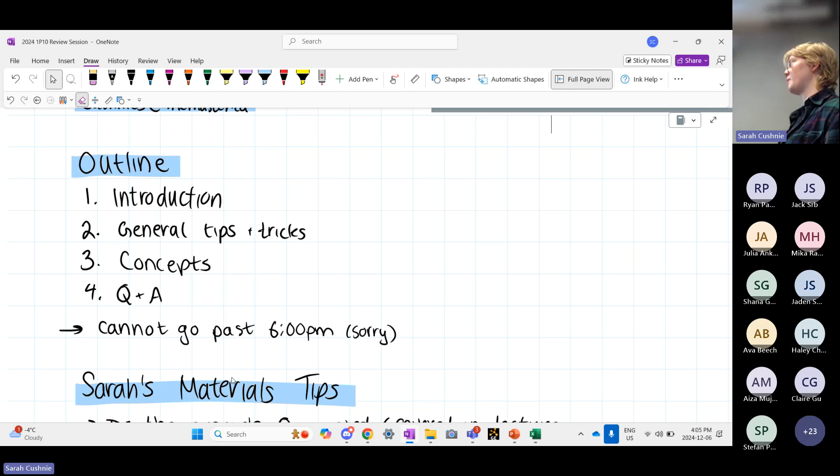So kind of what I'm going to be doing: I just did a bit of an introduction, I'm going to go over a few more things. I'll go over some general tips and tricks for the mid-year exam. Then I'm going to review some core concepts that I think are really important to your overall understanding of materials engineering. And then after that, we can do any sort of Q&A that you may have. But I cannot stay past 6 o'clock. If we do run out of time, then of course my email is always open for questions. I would so much rather answer your materials questions than study for my own exams.

And then my last disclaimers before we get started: I am not a professor, I'm not a TA, I'm not an expert. So I can't guarantee that everything I say will be 100% correct, but I have been in the materials engineering stream for quite some time, so I like to think I have a decent concept of it.

You guys are also covering a lot of different content than what we did in first year. Some of it's the same, some of it's different, so I might not be an expert on some specifics. Some general tips: do the example questions posted and covered in lecture. My midterm for 1P10 and the final exam had some questions exactly the same as those in the lecture slides, even the numbers, which was crazy because ours was open book.

In terms of materials engineering, I really suggest focusing on understanding the concepts, not just memorizing them. There's a lot of content, but if you can relate the concepts together, it'll make it a lot easier. I'm going to try my best to explain how all these different concepts relate to each other.

The exam can feel really long. I remember the 1P10 exam felt particularly long because there were so many different components, but just take a deep breath, I believe in you, you got this. The other two things: watch your units. Make sure you always include units in your answers, and understand unit conversions like newtons over meter squared versus newtons over millimeter squared. That really tripped me up back in first year.

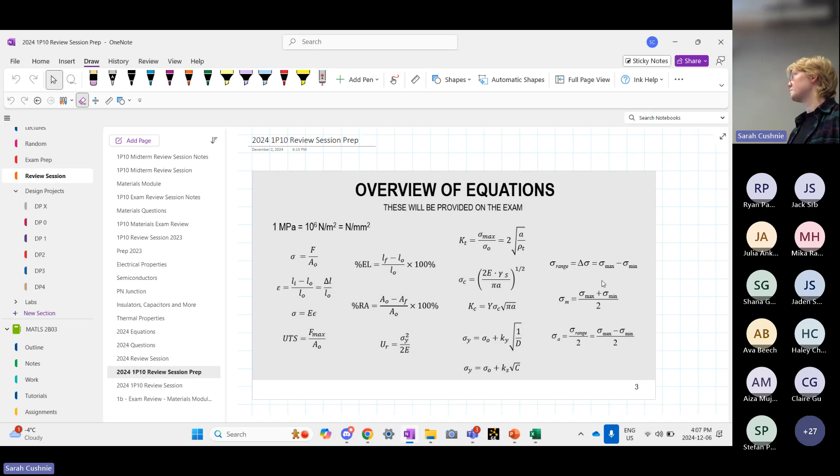Understand your formula sheet. You're given this formula sheet, and it's really important going into the exam that you understand what all these symbols mean and what they're called, so that when you're asked to calculate, for example, the yield stress, you're not looking at your formula sheet wondering what equation to use. Even if you don't know exactly how to solve something, you can quickly narrow down your options just by understanding your formula sheet.

So those are my general tips. Now we're going to get started into our main concepts here.

The big question I want you to continually ask yourself as we review materials engineering is: what makes each material different? What properties are changing? That means, what is happening in the material that changes its properties? How is a metal different from a polymer? What is actually happening there, and how does that affect its behavior?

As we go through this overarching question, we're going to talk about the types of materials. Then we'll get into bonding, stress and strain, fracture mechanisms, and strengthening mechanisms. I know you covered other topics too, but we only have so much time, and I think these are the most overarching concepts in general.

If you have any questions or points, just raise your hand, yell at me, whatever. The first thing we're going to talk about is types of materials. There are three main types of materials.

The first one we're going to talk about is metals. We're all familiar with metals—I want us to try to relate these back to things we know, like cars or the size of whiteboards, things like that. They're all metals. We know that they're hard, we know you can bend them if you try, like bending a spoon. We know that they're ductile, and we know they can conduct heat—for example, if there's a metal pot and you touch it, it's going to be really hot. So those are some of its properties.

We also have polymers, which is just a fancy word for plastics. Again, we can think back to examples of plastics in our lives, and there are so many of them, right?

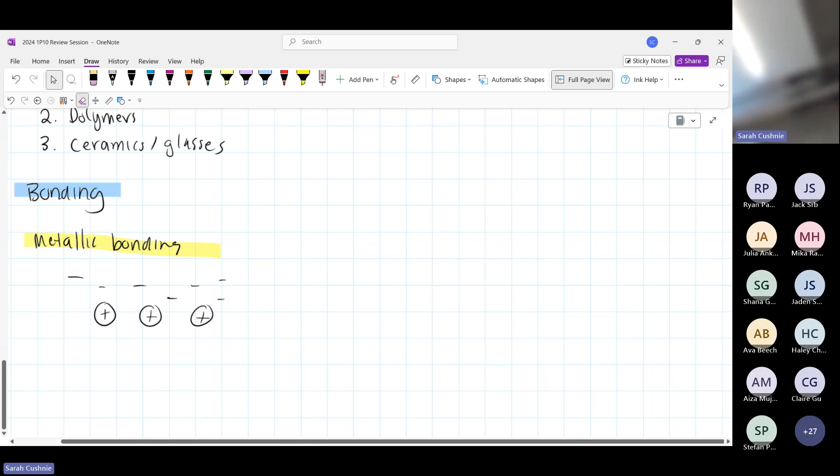The way metallic bonding works is we have all of our protons in our atoms, and their electrons form what's called a sea of electrons. So we have all of these negative charges, but they're not connected to any particular atom. What they're doing is they kind of just float around, and they're attracted in general to the dense proton clump, protons and neutrons, but they're not necessarily bound to any specific one.

Because of this, these electrons are able to move back and forth. They're not bound to any specific proton, which means they're able to move back and forth, and that's what gives it its conductive properties. So it's conductive because of that sea of electrons.

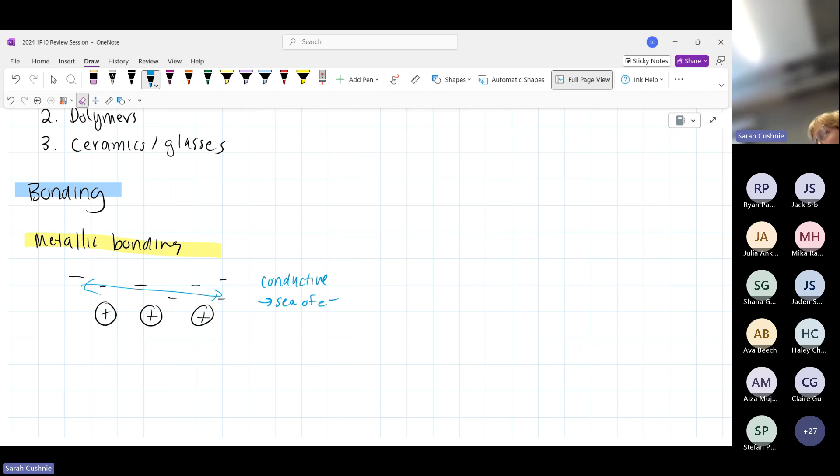Also, because these electrons aren't firmly bound, that means there aren't super strong bonds in between all the materials, which means they're able to be deformed a little bit. We're not creating some sort of lattice where we have very specific bonds. They're kind of floating around, which means we're able to move them back and forth, twist it, turn it, whatever, and that makes it ductile. So we're seeing how we can relate the kind of bonding present to the properties of the metal.

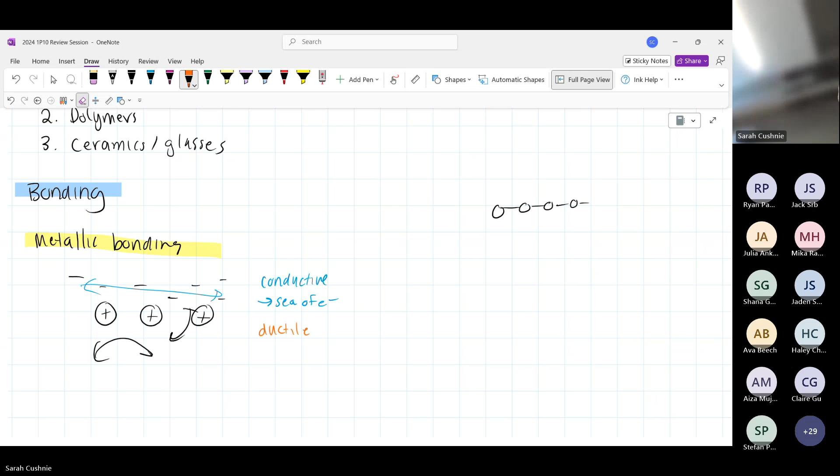The next kind of bonding we can talk about is ionic bonding. No, actually, we're going to do covalent bonding first to match up. So we're going to do covalent bonding. You guys take chemistry second semester now, don't you? Okay, but from high school chemistry, you probably remember covalent bonding. This is sharing electrons. So we have, whatever, two, we're sharing the electrons. This is genuinely a terrible drawing, but we're sharing it on the same valence, whatever it looks like. What this comes down to is sharing electrons.

Now note that this is directional, right? So we're not sharing in a sea of electrons where there's no specific direction the bonding is occurring, but in covalent bonding, we're bonding with an atom next to us. It's very directional.

So because of this, because it is directional, that means it depends on the ions themselves. Depending on how strong these charges are, the strength of the charge will determine a lot of the properties of the bond.

So what this means is we can change the charge in the covalent bonding depending on whatever material we have. By changing that, by changing the number of bonds, all these quick things we can change, we're going to change the strength of the bond dramatically. And if we have a stronger bond, that means it's going to be harder to deform, harder to move, making the material much more hard. But if we have weaker bonds, it's going to be a lot easier to deform, more ductile. This kind of bonding is present in polymers, and this explains why we have such a wide variety of applications and properties in polymers, because you can so quickly change the covalent bonding by changing the ions themselves, by changing the number of bonds present.

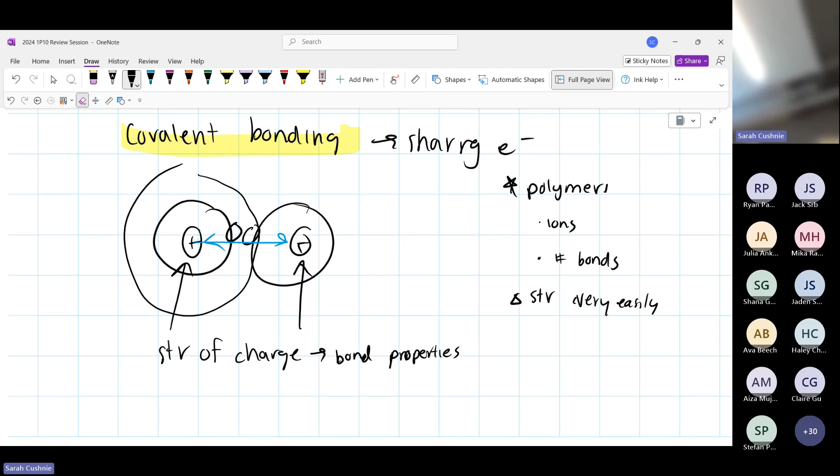By changing the number of bonds present, all of this means we can change the strength a lot, very easily, and change it by a lot. This is typically done by non-metallic elements. Again, you think of polymers, you think of carbon, nitrogen, and things like that.

The last kind of bonding is ionic bonding. These are my favorite because I think they're kind of fun. And ionic bonding, again, we hear of this all the time. It's where you steal an electron.

So we have some sort of positive charge, and then we have some sort of negative charge, and it goes yoink, and it steals the electron. In a very technical term, I think you should write that on the exam. And what this means, because we're stealing an electron, right? Like you give up the valence electron or you take the valence electron, whatever. Because we're stealing this electron, that makes it very, very strong. But once again, this is very directional. So we're stealing it from a very specific atom.

So what we're going to end up with, let's say we have a metallic element, metal, and that's going to steal the electron. Oh no, it's going to give up electrons, give up E. And then we're going to have some sort of non-metallic, and this is going to take E. We're going to have some sort of lattice that ends up being formed, right? Here we have, I'm just going to do it in one direction to be safe. So we have all of these bonds going back and forth where we're stealing it from a very specific atom.

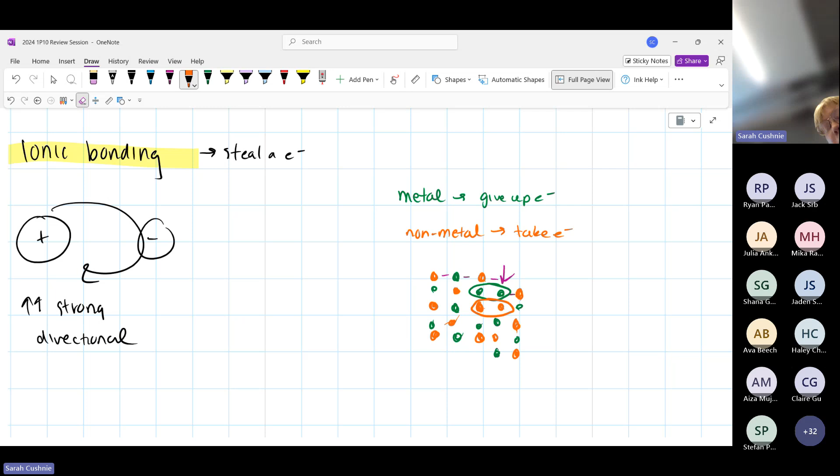But what happens if we were to, for example, apply some force to one of those rows? And now we shift this all down by one. Oh, actually, this is a terrible example. I need to do a proper lattice for this example to make sense. Okay, so now we apply some sort of force, and we end up shifting this down by one spot in the lattice. Now all of a sudden, we have the green next to the green, and we have the orange next to the orange. I realized that these were terrible color choices for anyone who might be colorblind, so hopefully my circles make enough sense.

We have these two lined up to each other. These are like charges, remember? And you have two of the oranges lined up to each other. These are like charges. And if you remember from high school physics or whatever background you may have, like charges repel each other. So as soon as you have a mild amount of deformation and you get those like charges next to each other, they're going to be repelled so hard, and we're going to end up actually breaking this bond. So that's going to separate. So what this means is that ionic bonding is extremely brittle. It cannot withstand very much deformation until it snaps apart.

And this again relates to the material properties. So I'm just going to write here, very brittle. And this is seen in ceramics. And again, when I think of ceramics, I think of a dinner plate, right? As soon as you have any sort of crack that forms, it just snaps apart because you get a tiny amount of deformation. And now you have these like charges lined up against each other, and they don't like that. So they're going to push each other away, and they're going to end up breaking those bonds.

Ceramics. Some other properties that go along with the very strong bonding in ionics is that it has a very high melting temperature. And then these electrons, right, they're stolen. They're not being shared, which means that it's not going to conduct at all. So no conduction. It's kind of fun. Sometimes a prof, I don't know if Dr. Sask ever did this, will bring little bits of magnetic lattices and show you how if you just move it slightly, it'll all blow apart. It's kind of fun to play with.

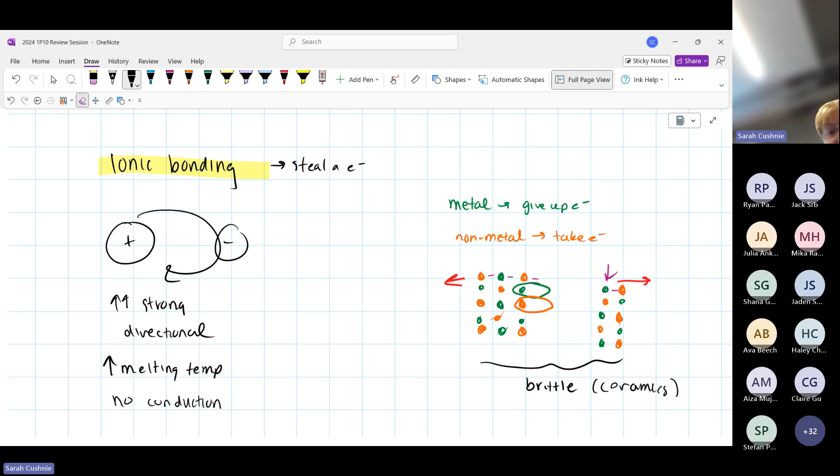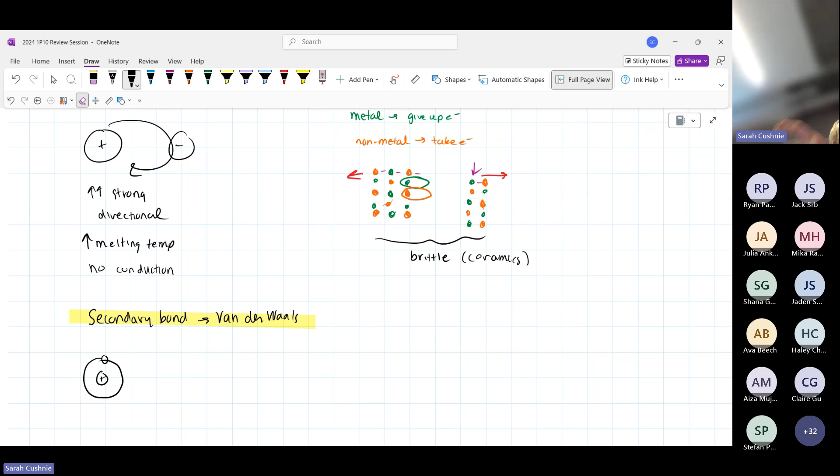Anyways, so those are the three kinds of bondings. There's also the secondary bonding. So last piece of bonding here: secondary bonding, or van der Waals. So essentially, molecules have electrons, right? And we like to think of our electrons as this nice little valence, but in reality, it's a bit of a cloud. They're just kind of existing there in some sort of general area.

And what happens is that for whatever reason, this cloud of electrons is going to orient itself ever so slightly unsymmetrical, and it's going to create a temporary dipole. So now we have this electron that's not fully centered, so we're going to have a bit more of a negative charge on one end where that electron cloud is, and a bit more of a positive charge on the other end.

And now let's say we have that happen to another molecule nearby, right? Again, we have this electron cloud, but all of a sudden we have a positive charge right next to it. The negatives are going to be attracted to that, so it's going to form a secondary dipole in response. And what this does is we're going to get a very, very weak bond between them because we have a bit of a positive charge and a bit of a negative charge, so they're going to attract.

These are really, really weak though, because, in ionic bonding, we have those ions that are present. We have those positive and negative charges that are there. But in terms of van der Waals, these are temporary fluctuating dipoles, which just means that they're there just because the electron cloud shifted a little bit, but it's not going to be there all the time. So that means that it's very weak.

Now, why do we care about this? That is because these bonds are often present again in polymers. So we'll have a polymer chain, and then I'll have another polymer chain, and these are connected by covalent bonds, but between the chains is where we have the van der Waals bonding. And this is why polymers as well can be very weak if we don't have very strong van der Waals forces.

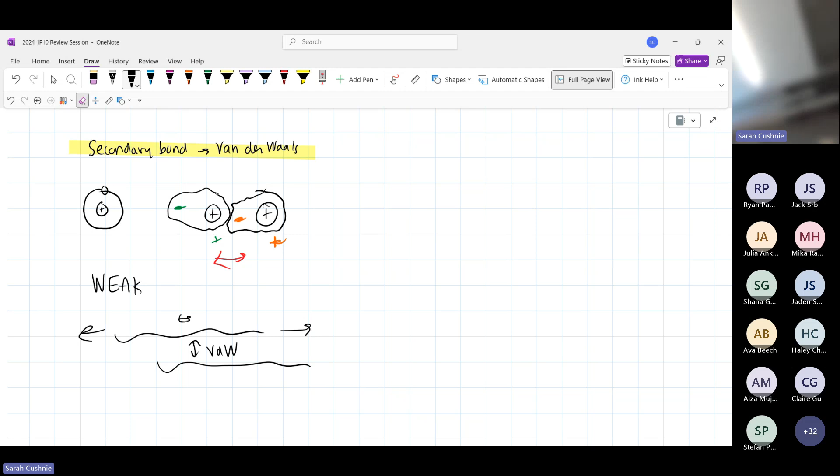Sometimes it's kind of cool. You can get extruded plastic where in one direction you're pulling on the polymer chains like this. So you're pulling on those covalent bonds and it's really, really strong. But then as soon as you pull it in the other direction, all you're doing is separating those chains based on the van der Waals forces and it has no strength at all. And I think it's kind of neat.

But basically all we need to know about this is that it's the electron cloud that's shifting and makes them very, very weak. And that's kind of my quick overview on bonding in molecules. Any questions so far? Beautiful. Go for it.

Yes, of course. That was a really terrible drawing on my part. So I like to think of polymer chains. Polymers are very long molecules. I like to think of them as spaghetti noodles because I'm not a very technical person when I think about studying. So we have this spaghetti noodle, that's a polymer chain, right? And we have another spaghetti noodle, that's a polymer chain next to it. And within the polymer chain, we have covalent bonds that are holding the molecules together, right?

Like the CO, whatever it is, I took Orgo last year, so I actually forget everything about it.

But you end up with these strong chains. If you were to pull on it along the length of the noodle, it's going to have some force resisting you. But between them, we're having those fluctuating dipoles. So they're having those van der Waals forces that are holding them together. This is like if you have two spaghetti noodles and you have a bit of starch that connects them, right? So they're held together a little bit by those van der Waals forces. But it's not nearly as strong as the actual force of the covalent bonds that's holding the thing together.

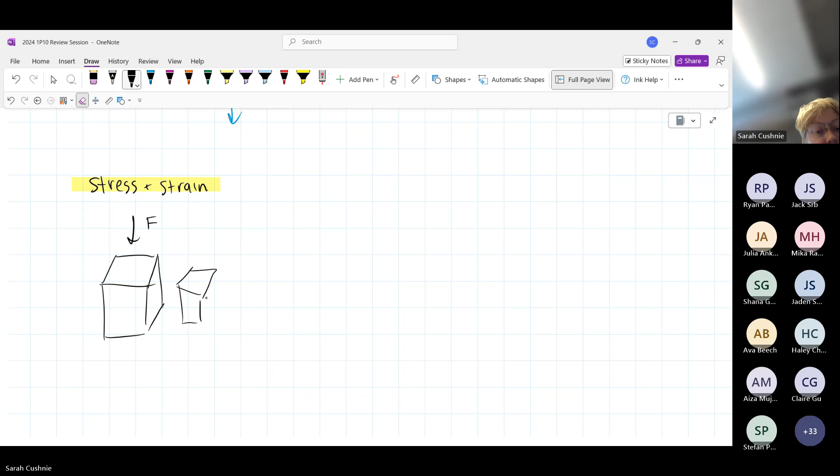And now I apply the exact same force on it. It's going to squish, but not nearly as much. It's just going to squish a little bit. Even if these blocks are made out of the exact same material, it's going to squish less if it's big than if it's small. So if we're trying to describe the behavior of a material, we can't just say, oh, it's squished by this amount, like its displacement was this much, if you want to be a bit more good words than just saying squishing it.

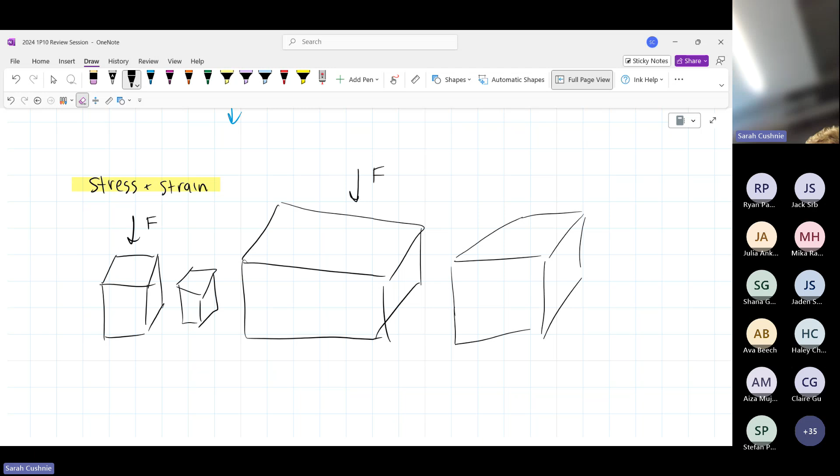But what we do as engineers is we have to find some sort of value to quantify how much it decreased in length by and how much force we were actually applying, to compare these two situations. And that's where stress and strain come into play. So stress is given by sigma, and it's equal to the force over the area. So in this case, if we're applying the same force in both cases, we don't have the same stress because this area here is much smaller than the area on the big block.

So that means that the small block has a higher stress, whereas the bigger block has a much lower stress because it is a much higher area. Note that the area that we take here, when we're talking about normal stress at least, is the area that's perpendicular to the force that's applied. And now we can define strain using epsilon is equal to the change in length over the initial length. So what that is saying is essentially how much did it actually change in length by. So if this is its initial length, L naught, the change in length is however much it was squished by. That's delta L.

So the units for stress, if we were to look into the units here, this is newtons over meters squared, if you were to work in SI units, because newtons for force, meters squared for area, and that would give you a unit of pascals, which is what we typically refer to our stress in terms of. A more common unit for stress, however, would be newtons over millimeters squared, and that gives you megapascals, which is equal to times 10 to the 6 pascals. So it's really, again, just important to know that these conversions exist, so when you're doing your questions, you have the right answer, or the right units.

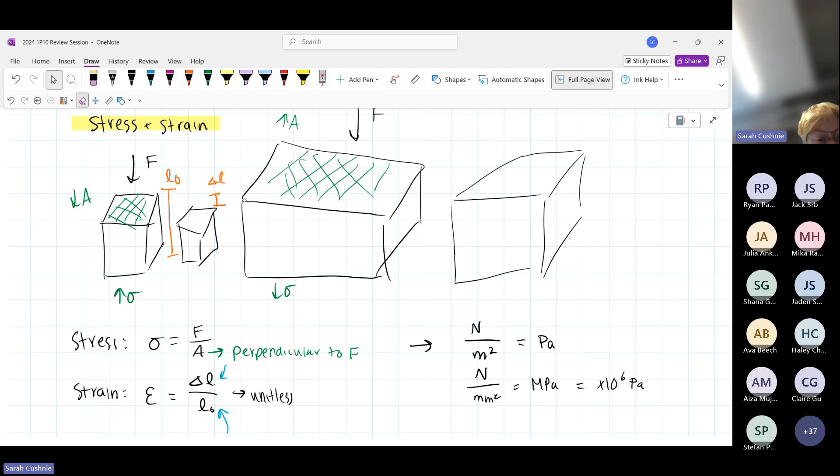So there's a few different things that can happen when we apply this force to a material. So let's say that we have some bonds here. I'm going to make another lattice. Check. So again, I'm going to apply some sort of force, just on the edge, for example. Or we can apply it over the entire area. So I'm applying some force. And what's going to happen when I start to apply this force is the bonds are going to bend a little bit, right? They're going to get squished as I apply.

Actually, for a better example, I'm going to be applying a tensile force. So as we start, the bonds are just going to stretch a little bit, right? You can think of, for example, covalent bonding or ionic bonding. Those electrons that are being stolen or shared are still connected to that initial atom that they were bonded with. They're just a little bit further away, and they're not happy about that. So we're going to start by bonds stretching.

Bonds stretch. And what happens is when these bonds stretch, as soon as you release that force, they return back because they're not happy being stretched, but they're like, whatever, we can go a little bit far away, but we're going to come back to what's normal as soon as we release that force. So they're going to get all stretched out, but as soon as you release the force, it's going back to normal. But if you apply more and more force, these bonds are actually going to break. Bonds break. If you want to be technical, then you can talk about the planes shearing.

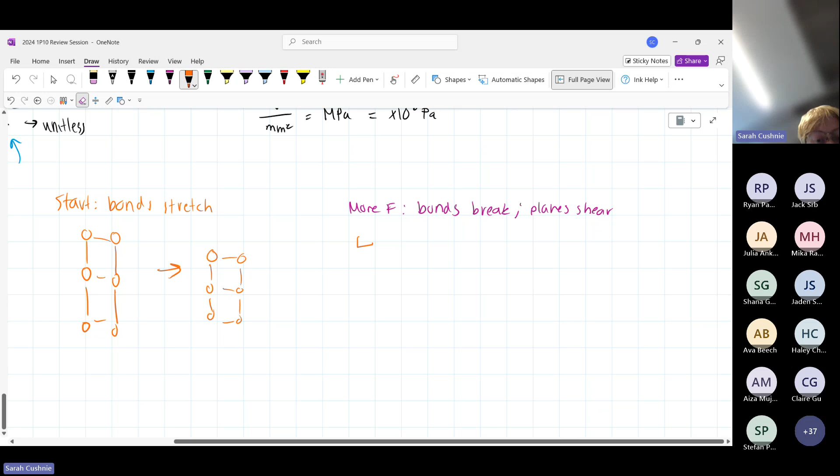That's what you had in your slides, at least. So what's going to happen is... my computer's really old, so the middle of the touchscreen doesn't work properly. Every now and again I go to write in it and it just glitches out, so bear with me.

So we have our lattice. I'll draw a proper hexagonal lattice. Now we're stretching it. If you think about this, we have planes running along it, which are just directions where the bonds are closest to each other, where the atoms are closest.

But eventually we pull on it so far that it's going to shift, and we end up having something like this, where we've broken a bunch of these bonds. Those bonds are now broken, and the atoms themselves have moved from where they were before. If you were to release it, those bonds aren't going to go back—they no longer have that stretch pulling them back to their initial position. They're stuck there in that broken state. So this is irreversible.

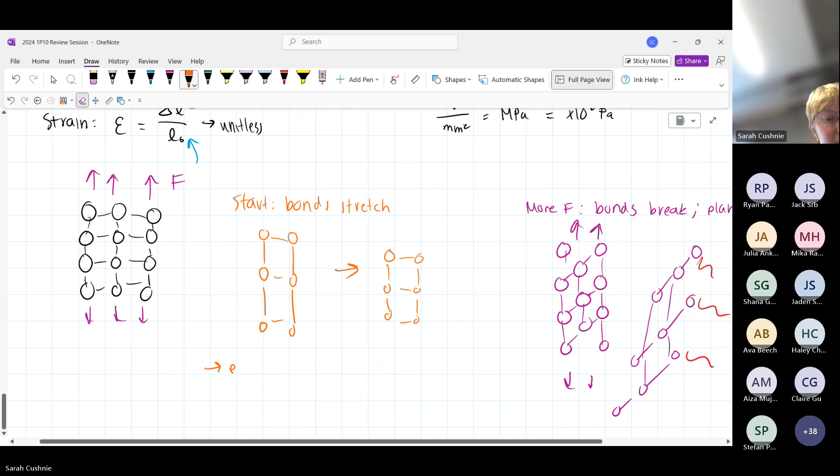That face. Now we have words for what these are called. When we're just stretching it and returning it, we call this elastic deformation—like an elastic spring, if you have F and X, it goes up and down along that path, back and forth, nice and happy. But as soon as we have some sort of breakage going on, some irreversible deformation, that's called plastic deformation.

And it all has to do with the bonding that's going on. So here's a question—I don't know if you're going to enjoy this class participation or not, you can just stare at me blankly if you want. But what do you think would happen if we had plastic deformation in a ceramic material? A ceramic material, remember, has those ionic bonds.

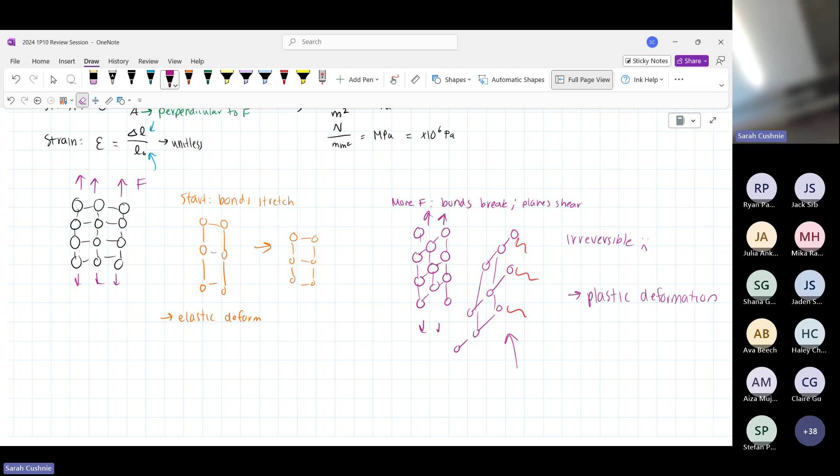Exactly. So we can see that as soon as you try to add any sort of plastic deformation to an ionic material, it's going to snap, because remember we have those alternating charges, and as soon as we have that shear, they're going to be next to charges they normally repel, and it'll break. So this is a hint that ceramics don't have any plastic deformation.

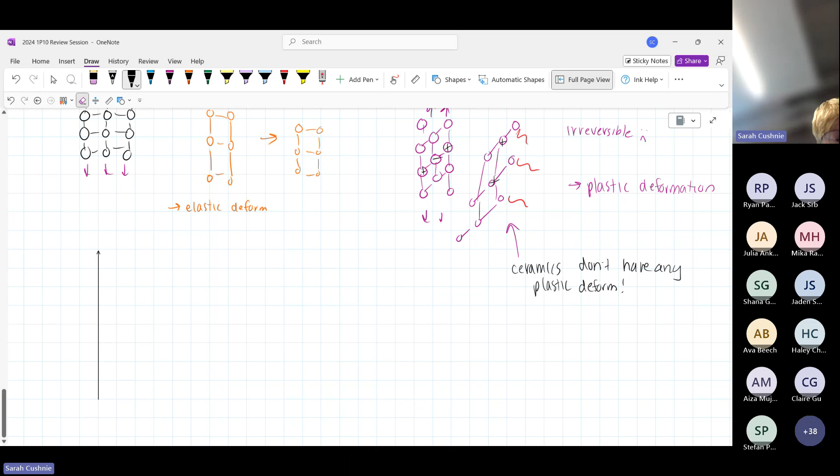So we can start to represent this and draw out these different kinds of deformation and stress and strain on our stress and strain curves. These are like the cornerstone to materials engineering—not really, but they're very important.

We have stress on the y-axis and strain on the x-axis, and this really threw me off when I was first learning it, because I thought, aren't we applying a force? Isn't that the independent variable? Shouldn't the independent variable be on the x-axis? But in reality, when you're doing these tests, you're controlling the rate of deformation, then registering how much force you need to apply to get that deformation.

We're going to start with elastic deformation, relating back to the concept of springs from Physics 1D03—if you have F and X, you get a straight line with a slope of K. So we end up with a linear trend as you stretch it out, having some resistance as those bonds want to pull you back in. They don't like being stretched; they want to return to their optimal bond length. But if you let go, you return exactly where you were before—you can stretch it out, let go, and return to the exact same spot.

So this is our elastic region. Similar to the spring constant for a Hookean spring, we can quantify this slope. The slope is equal to the change in y over the change in x, which in this case is equal to stress over strain. We call this slope Young's modulus, or the elastic modulus.

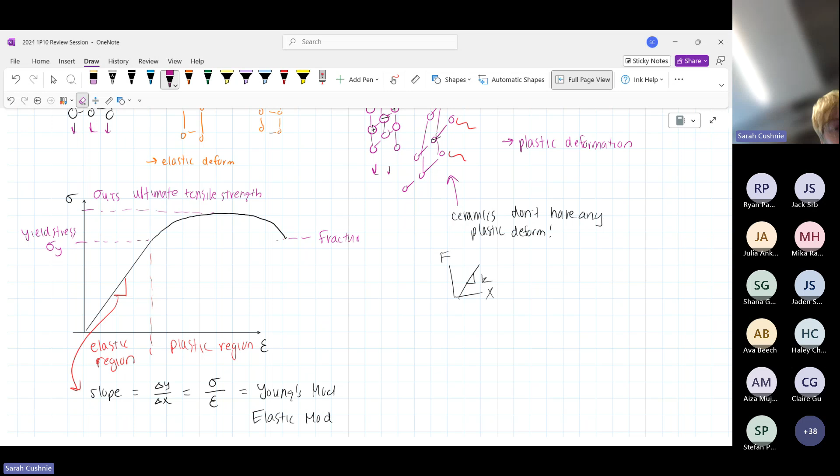That's because anytime we do this test, you're doing tensile testing, so that's the ultimate strength, the ultimate force you get when doing that tensile test. And then here at the end, that's the fracture strength, because that's where it fractures.

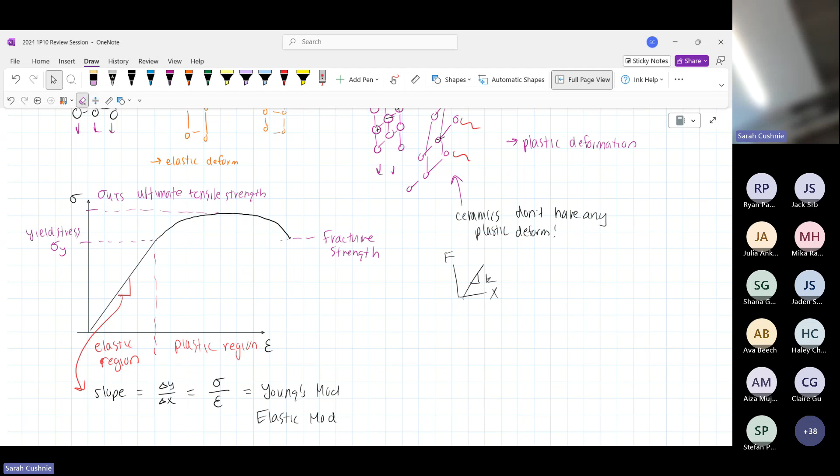It should be noted, this is a bit more extra than what you'll need to know, but I think it's fun. As you're undergoing this process, pulling a material apart, you start with something like this, and it's going to get thinner and thinner as it gets longer and longer. You could think of pulling silly putty or something, it gets thinner as you pull it.

Technically, as you continue to break it, the area decreases. So if you're applying the same force with a smaller area, the stress would actually continue to increase. However, that's a lot of effort, so as engineers, this is technically the engineering stress and strain we're going over, where we only calculate based off the initial area. If you were to calculate the true stress or strain, based on how the area changes over time, it would actually keep going upwards and look something like this. I did one lab on it in second year and thought that was pretty cool, but you never talk about it again because it's a pain to calculate. That's your fun fact of the day.

Some other things to know about this graph: the area underneath. We can think of this as area equals x times y, which equals strain times stress. In terms of units, that's unitless times Newton over meter squared. And Newton over meter squared, if you do the full unit derivation, is also equal to the work being done. So the area under the graph is called the resilience, or maybe it's called the toughness.

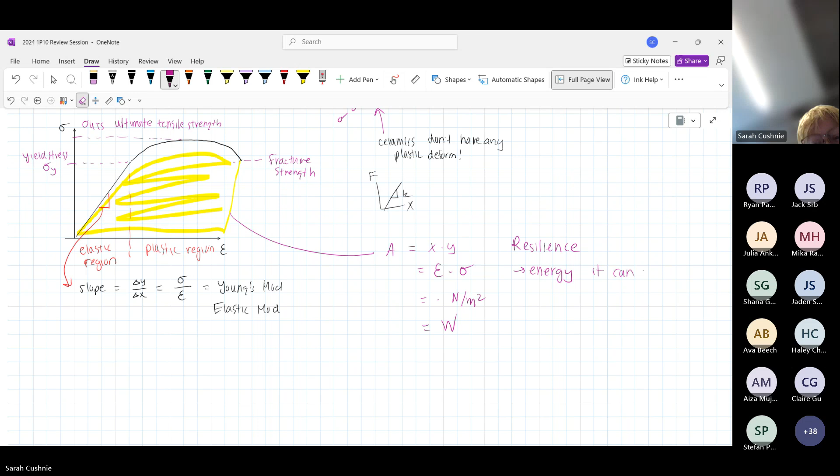If you think of two materials, material 1 and material 2, that have the exact same failure stress, the exact same yield stress, exact same elastic modulus, whatever, but one has a bigger area under the curve, it can absorb more energy. There are a lot of good applications for things that can absorb a lot of energy. For example, with bones, we want bones that can absorb a lot of energy before they fracture. We talk about energy absorption as, for example, when you undergo osteoporosis.

I have my biomechanics midterm next week, which is what's on my mind. We talk about properties like this as they relate to the human body and applications like that.

So we talked a little bit previously about, oh, OneNote, don't glance at me. Every now and again OneNote decides that I'm actually touching my screen somewhere that I'm not, and then I'm unable to scroll, and it bothers me so much. Is it going to work? We're just going to restart OneNote real quick. Ignore me.

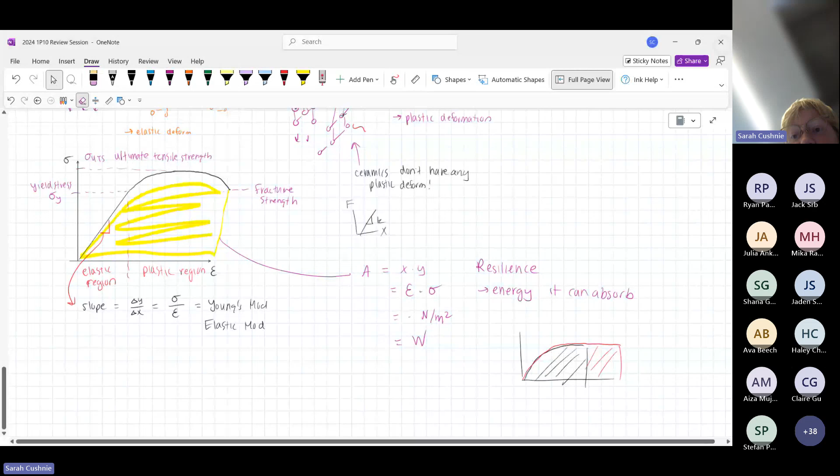So now let's start talking about the stress and strain curves for different materials. I'm going to draw three here: stress, strain, stress, strain, and then stress, strain.

We already talked about ceramics having basically no plastic region whatsoever. That's because they have ionic bonding, so as soon as you start to deform them, those similarly charged ions repel each other and it snaps. So it's basically a straight line, with a very high Young's modulus and a very high ultimate tensile strength, equal to the yield strength since there's no plastic deformation. But it has very low strain, very low elongation.

The next we're going to talk about is metals. Metals have strong bonding, metallic bonding. We still have those positively charged ions being bonded, with electrons floating around creating those strong bonds, but it's not quite as strong as ionic bonds.

So metals have a decently high yield strength, but then they enter a plastic region. Because we have that sea of electrons, there's no specific directional bonding, so it can move around and adapt to changes, making it very ductile. That gives us the typical stress strain curve, with our yield strength and ultimate tensile strength. I like to think of metals as a nice happy medium between ceramics and polymers.

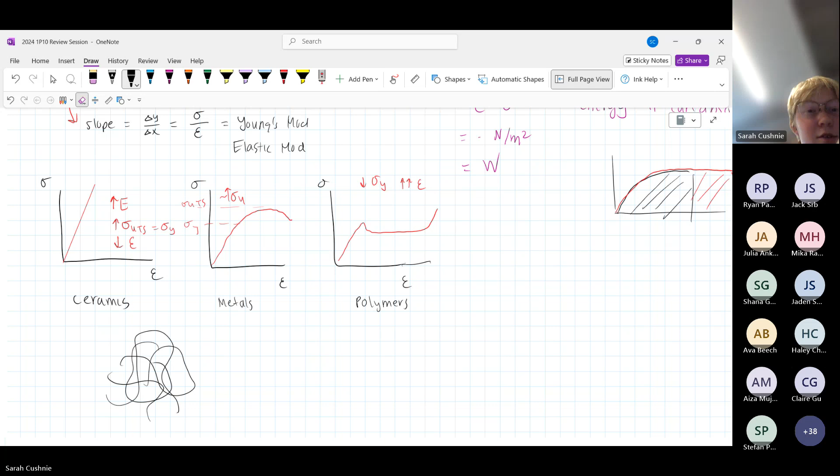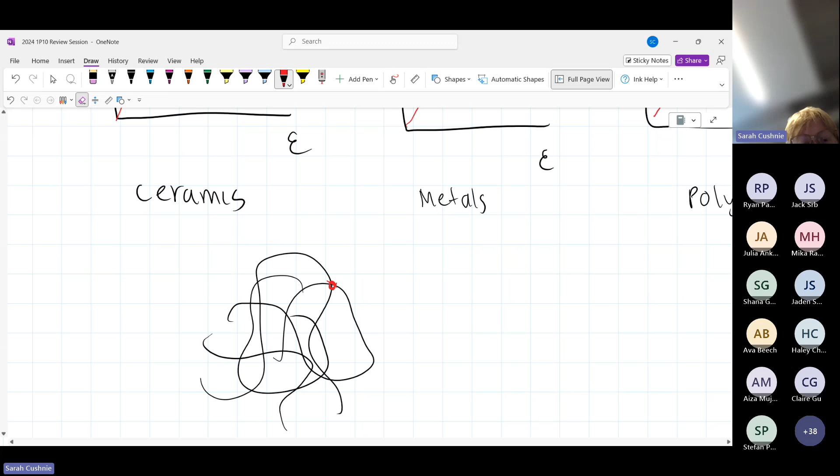Let's say we have a pot of spaghetti noodles, and all of these noodles are different polymers. In between all the areas where the polymers cross over each other, we have bonds, and at each crossing point we could think of that as starch on the spaghetti noodles holding them together. So we have van der Waals forces happening every time we cross over.

When we start to pull them apart, at the start when we're applying force and deformation, we need to break all these van der Waals forces, and that takes a decent amount of work. That gives us the elastic region—as you pull more, you need more force to break these apart. But then suddenly we've broken those bonds, and now we just have long spaghetti noodles without really any strong bonds between them. So what we have to do now is basically like taking the two ends of the spaghetti and pulling those apart.

And all it is, is just untangling them. It's like if you had the cord of my phone because it's charging, right? I've untangled it, now I'm just pulling it apart. It doesn't take any force at all to pull it further. It's the exact same amount of force to pull it apart here as it is here.

For folks who are online, I'm so sorry you couldn't see that. But it's really just untangling it, which is why this doesn't take very much force. So this is low force and no change in stress either, and that's why we get this little horizontal region there, because we're just pulling them apart.

That's all we're doing. But then eventually our polymer chains are basically lined up. We've untangled them enough that they're just lined up. And now what we have to do is pull these apart, and that takes a lot of force because now we're pulling on those covalent bonds. Now we're trying to get those covalent bonds apart, and those are strong. That's why we get the final increase in stress, because it takes a lot more force to pull those apart than it was to break those initial van der Waals forces.

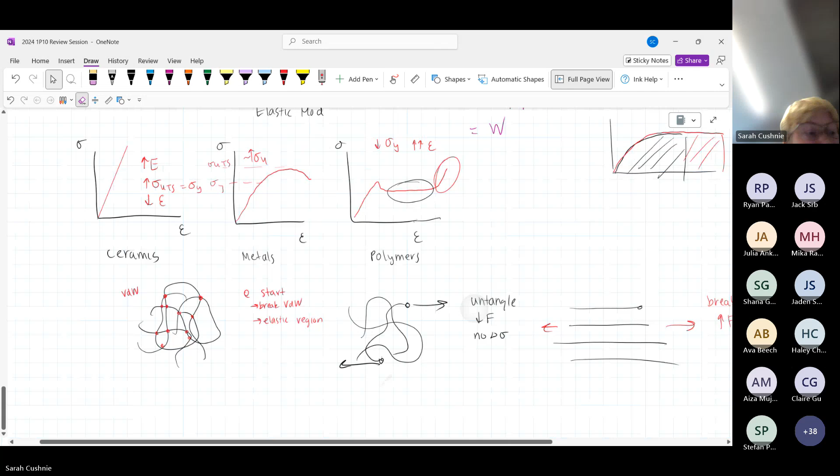So those are the main concepts that I wanted to cover with stress and strain. Are there any questions? Go for it.

Necking, yes. Yeah, it wasn't one of the main concepts, so I didn't put it into what I was going to talk about, but 100% we can talk about it.

So this kind of goes back to when I was talking about true stress and strain versus not true stress and strain. Let me just get the actual slide up so I don't totally goof it. Where would it be? No one knows. Oh, I found it. Okay.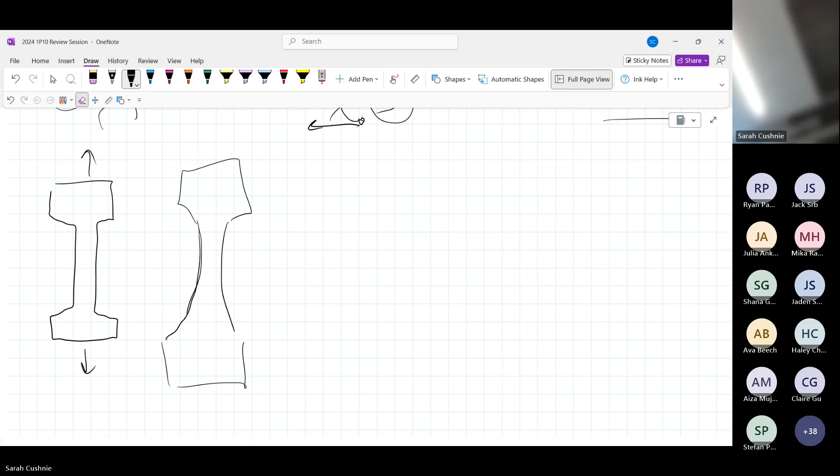So this is going to happen with any sort of thing where you're applying that tensile load: we're starting to get thinner and thinner in the middle. And as we do this, if we were taking into account the area that's being applied, right? We talk about stress being equal to force over area. So as we're doing necking, the area is decreasing.

So if we were to account for this, for the same stress, then we would actually have a higher force. So as we're applying this higher force in real life, it should look something like this. We should have that graph continue to go up.

But what happens is we're not actually accounting for that. We're talking about the initial cross-sectional area. So what's happening is we're applying the same force as before, but now we have a much smaller area. That's going to make the material feel it so much more, because it's feeling so much more stress than what we were applying at the beginning for the same force. So it's going to feel a very, very high stress in those thinner areas.

Because it has the same force but smaller area, it's going to feel a higher stress. That's where it's going to break, in that necking area, because it feels higher stress. So as you continue to pull it apart, at that one section where it starts to undergo this necking process, it's going to quickly become the cause of fracture because it gets thinner and thinner and feels more and more force. Eventually it's going to snap there. Does that make sense?

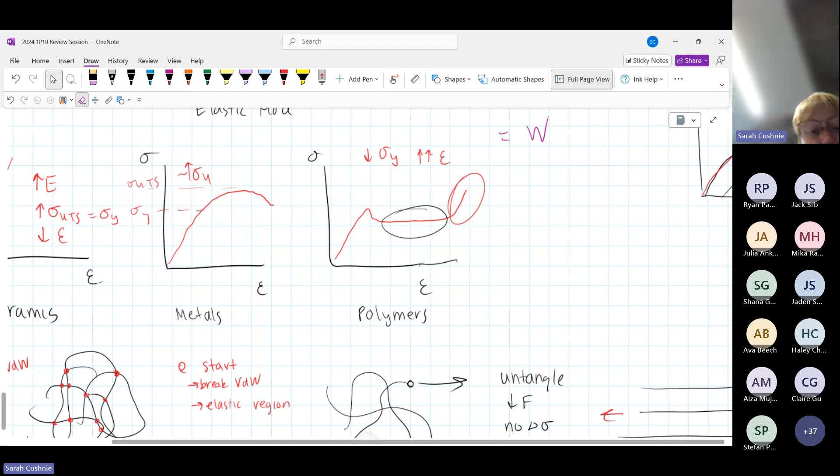Why does that peak go down? Excellent question. The reason it goes down is that at the start, when we're pulling, we need to break those van der Waals forces, which takes a lot of stress and force. But once they're all broken, we can decrease the force needed to pull them apart, because after that we're just untangling them, stretching out the polymers from their crumpled up state without breaking any more van der Waals forces. So it needs less force, less stress, compared to breaking those bonds. Does that make sense? Beautiful.

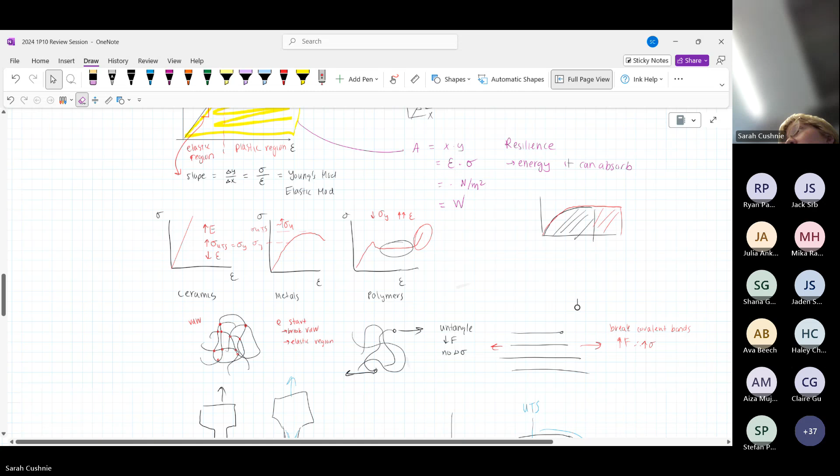Let's talk about fractures. A quick definition: you can talk about failure and you can talk about fracture. Fracture is when it snaps, when it breaks. Failure just means it no longer does its initial function, which can include fracture, but for example, let's say I have this pen. It's actually starting to fracture, it has a bit of a crack. But if the tip got super blunt from writing too hard and wasn't working properly, that could be considered a failure of the material from wear and tear, but it hasn't necessarily fractured. It's important to understand that failure isn't necessarily a fracture. So when we're talking about fracture, we're talking about things breaking, falling apart, and there are two different ways this can happen.

The first is a ductile fracture. A ductile fracture is kind of what it sounds like, it's ductile. What happens here is that the material undergoes some sort of deformation, some sort of bending, before it snaps.

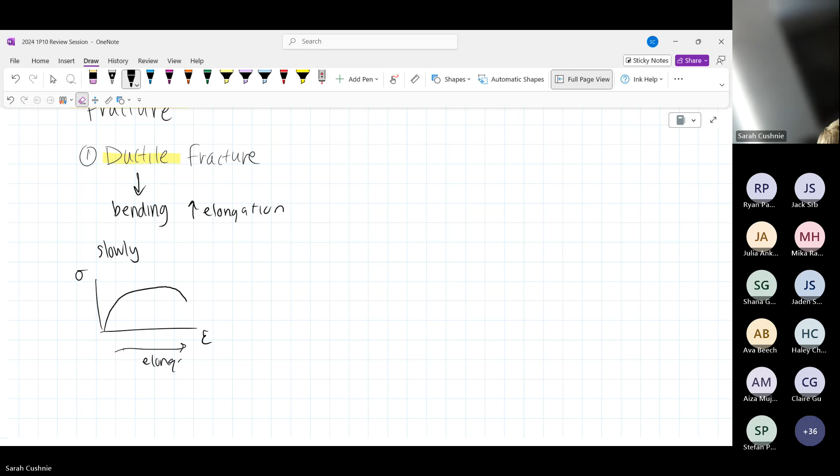So some things about this, because you have bending, then you have some warning signs ahead of time, right? So it happens a bit more slowly because we see this happening. So bending, so we have large elongation. Because it happens slowly, we have large elongation. If we were to think of this in terms of a stress strain graph, we're going to have something like this. Because we have this large elongation, remember, if we talk about the area under the graph, that gives us our energy absorption or our resilience. So in these ductile fractures, we have high energy absorption. So that is one example.

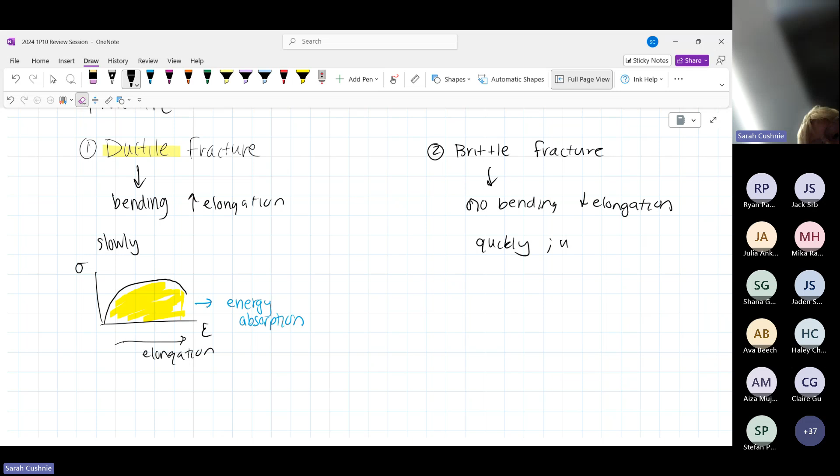The other kind of fracture is a brittle fracture, basically the exact opposite. So what happens in this is that we don't have any bending. No bending. So we have very low elongation. And what that means is that it happens very quickly. And it's very unstable. Once it starts to happen, you really can't stop it. So if we were to think of a stress strain graph, it would look something like this, where you get very, very low energy absorption. And it just snaps. You have very little deformation. You just apply so much force that it snaps.

So if we were to think of this in terms of biomedical application, again, I'm taking biomechanics right now. So if we're talking about bone fractures, right? If you were to be in a car crash and your bone just snaps in two, that would be some sort of brittle fracture. We don't have any warning, it just happens. But for example, if you were to have a stress fracture where you apply the stress continually over time and over time, that would be a bit more of a ductile fracture.

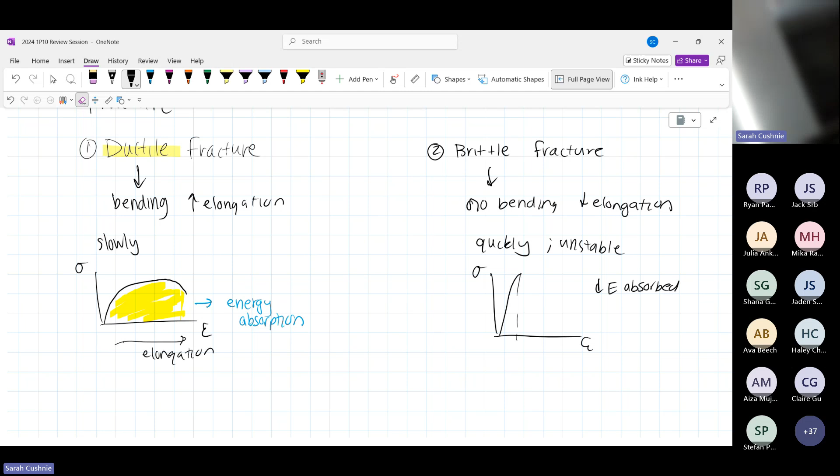So these can both happen in a large variety of materials. Brittle fractures are very common in materials that have stress strain curves that look like that. So for example, in ceramics, the example that we have in your slide is like a hip implant material because those can be made out of ceramics, right? Whereas a ductile fracture can be more common in things like metals, polymers, because they have a lot more of that potential for elongation.

And a good way that we quantify this, there's some snacks at the back if you want any.

So a good way that we can kind of quantify this, or we can start to do calculations on this, is this concept called stress concentration. If you're trying to remember this on the exam, just think that you're really stressed about concentrating enough to remember it. And what this is: let's say that we have some sort of small crack that forms in a material. And this can just happen, inherently we're going to have some areas that have slightly stronger bonds than others. So if we're applying the same force, we're just going to get some bonds that break a little bit first, right? Natural inhomogeneities in the material. So I like to think of it as we get this small crack in the material. So like this is the material, and that's a bit of a crack.

And let's think about the force that's being applied. If we're pulling this under tensile stress, we're pulling it up this way. So you can think about the stress concentration lines, if you will, is that we're pulling all along this line. We're pulling from the top, we're pulling from the bottom, right? And you can continue this line all the way through.

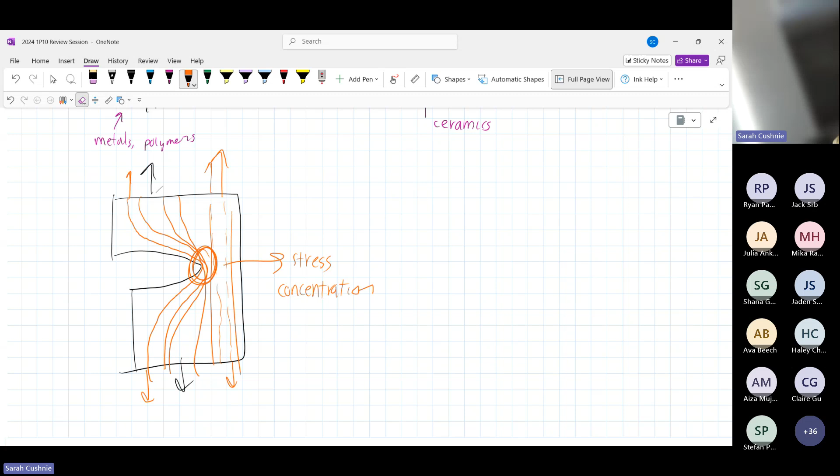A way we quantify this is using the stress concentration factor, KT. And this is equal to essentially the ratio of stress felt at that tip divided by the stress felt literally everywhere else. So this here would be sigma naught, and the stress in there is sigma max. You don't ever get values for that, though. We don't really have a way to calculate that stress, that sigma max at the tip. So we actually are going to calculate this through 2 root a over rho t.

Now I hate this equation because the variables make no sense. But what this means is the variables that we use here, a represents the length of the crack. But note that this is the length of a half crack, actually. So let's say we have a crack in a foam material that looks like this. The length of the crack that we measure is actually just one side of the crack. So this would be a, but the total length is 2a.

So if you're given, for example, an internal crack with a length of 2 millimeters, the a value would actually be 1 millimeter, because a only relates to one side of the crack, because we're only dealing with the stress concentration at one of these tips of the crack. And then this rho t is rho density. Psych, this rho t is the crack tip radius.

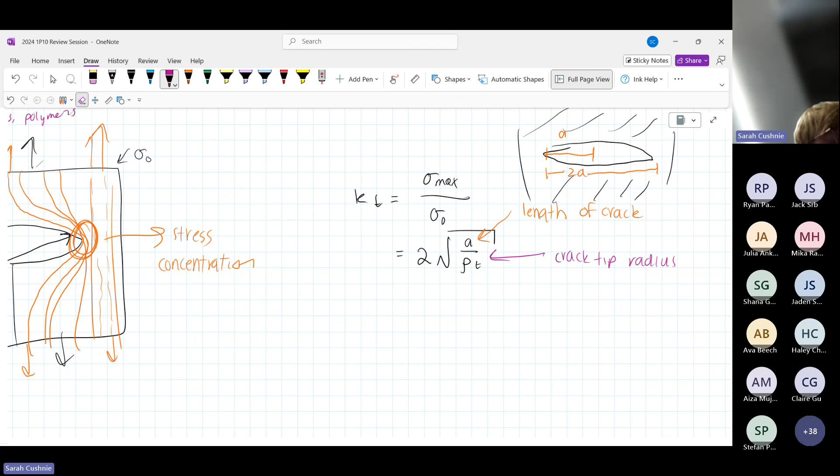And it's for reasons like this that I think it's really important to get comfortable using your formula sheet, because high key, if I looked at this equation, kt is equal to 2 root a over rho t, I would have no idea what any of those variables mean. But this is the crack tip radius. So basically at this tip here, if we were to blow it up, we have some sort of radius, and maybe it's like, I don't know, 2 microns. I actually don't know what values those would be. But if you're trying to calculate kt, you plug it into this equation.

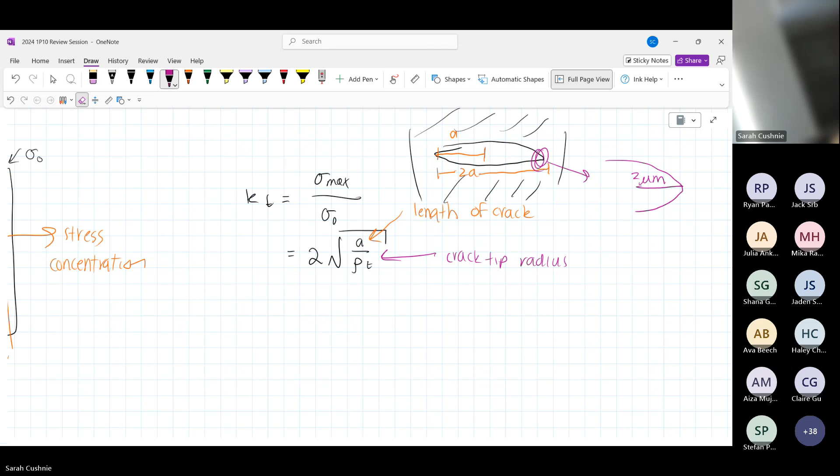So the next thing that we can talk about is how much I hate OneNote, and it's not gonna be happy with me right now.

Okay. Sorry, is the 2 root a over, is that just the max stress or is that the whole? That is for kt. Sorry, I did not specify that. I'll add kt there. What are the units for the length of a crack? Anything relating to meter. What about for a crack tip radius? Yeah, so you just want to make sure that these have the same units, because then they'll cancel out. For example, you might be given the length of a crack in millimeters, but the crack tip radius in micrometers. You just need to make sure you convert them so that they're the same. I don't know if Dr. Sass would give you 2 different units. Yes.

So now we're going to talk about the actual crack propagation. So let's say we have this crack in a material. How do we know if it's going to move through the material, if it's going to get bigger? So for brittle materials, remember, these are ones that have very quick propagation, we're given the formula sigma c is equal to (2 E gamma s over pi a) all to the 1/2.

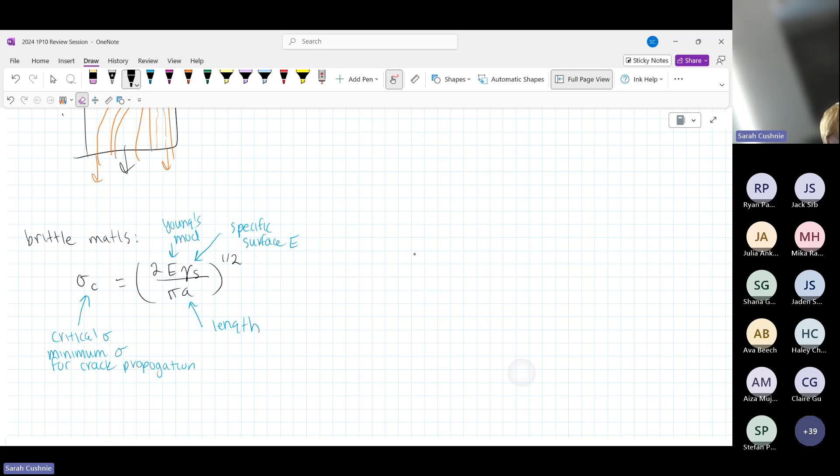And then A, again, is the length. So if we think about units here, the minimum stress, that would be in units of megapascals, for example, is equal to the square root of megapascals over meter, and then surface energy would be like joules. High key for this: if I was trying to do units for this, I would convert it all to SI units. So I would convert it into pascals, and then I would have pascals, joules, and meter.

I think it'd be joules per meter squared. I actually don't know, but if you put it into SI units, the units will work out. So I actually don't know the units for specific surface energy. I have to imagine it's joules per meter squared, but don't quote me on that. So that would be my tip: remember a pascal or megapascal is newtons per millimeter squared, and a joule is like a newton meter, right? Force times distance. So those might not cancel out if you keep it in terms of megapascals.

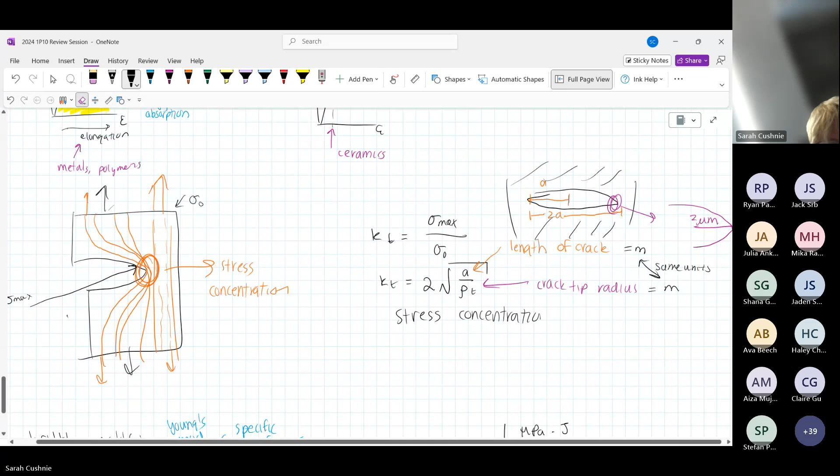So this is for a brittle material. And we can kind of quantify this. So remember, KT up here was our stress concentration factor. And now we have our critical stress. And now we have a very similar variable name to stress concentration factor. We can now call it the stress intensity factor. And this is just regular K, not KT. And K is equal to Y times sigma times root pi A. And we typically assume that Y is equal to 1.

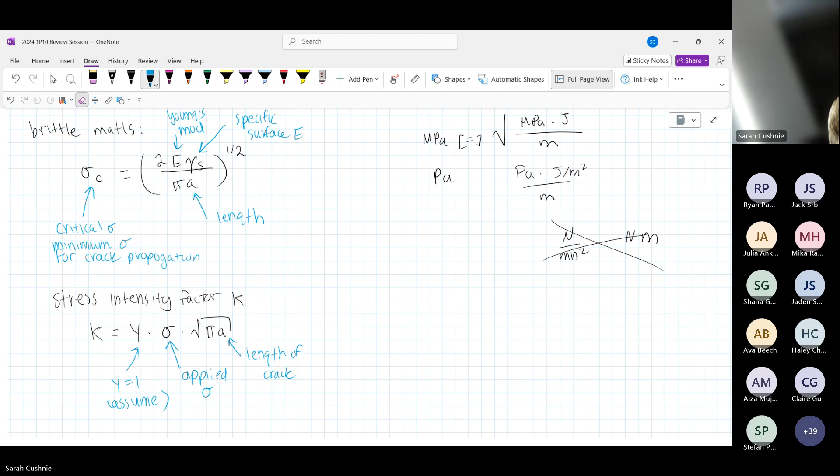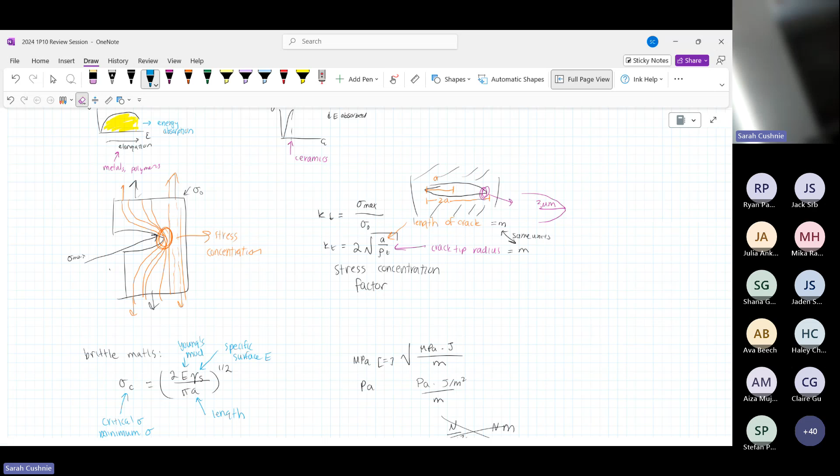And then this sigma is the applied stress. And then again, we have A, which is the length of the crack. And essentially, previously we talked about the stress concentration factor, and this describes how the stress will concentrate at the tip. The stress intensity factor talks more about, based on that concentration, what's the likelihood that it's going to propagate. So they're very, very similar values, but they have slightly different names.

And we can also talk now about another K value, because we love our Ks, which is the fracture toughness, Kc. So we have the stress concentration factor: how concentrated is that stress when we have some sort of crack? We have the stress intensity factor: what's the tendency for it to propagate? And now we have fracture toughness: how much can it resist that propagation?

And I'll be so real with you, fracture toughness is really the only one that I use in any of my courses these days. But they like to give you all the other ones so that you can mess up all your Ks on the exam. There are uses for them, but fracture toughness is by far, in my opinion, the most important. And this is given by Kc is equal to Y sigma C root pi A. So this is the exact same equation as before, but now instead of the applied stress, this is the critical stress.

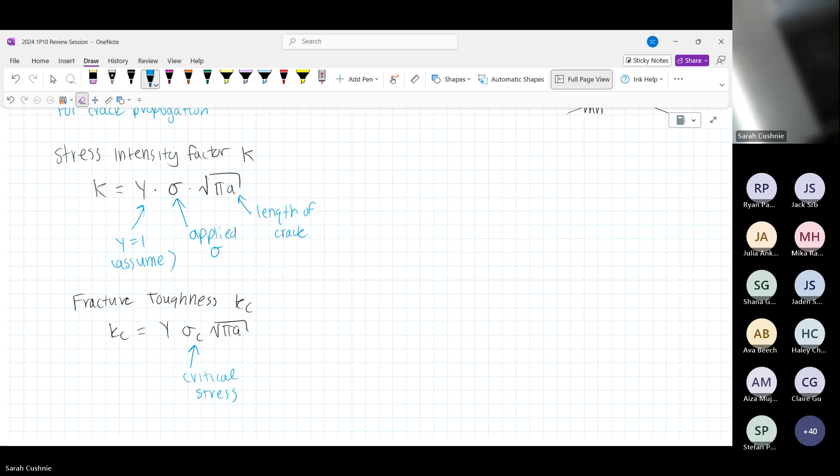So essentially the stress intensity factor is how are we going to respond to this increase in concentration of stress? And the fracture toughness is, what's that maximum stress that we can withstand? So if you were asked to solve for the critical stress, we have this equation up here for the critical stress, but we can also rearrange this equation down here. These are two different ways that they could ask you to solve for critical stress.

And the reason we care about critical stress is because we want to know how much force we can apply to a material before any crack could propagate. Let's say we have a material with cracks of up to 1 millimeter, like concrete, because concrete is full of cracks. We want to ask how much stress we can apply before those cracks propagate and the whole thing falls apart. That's why we care about these values.

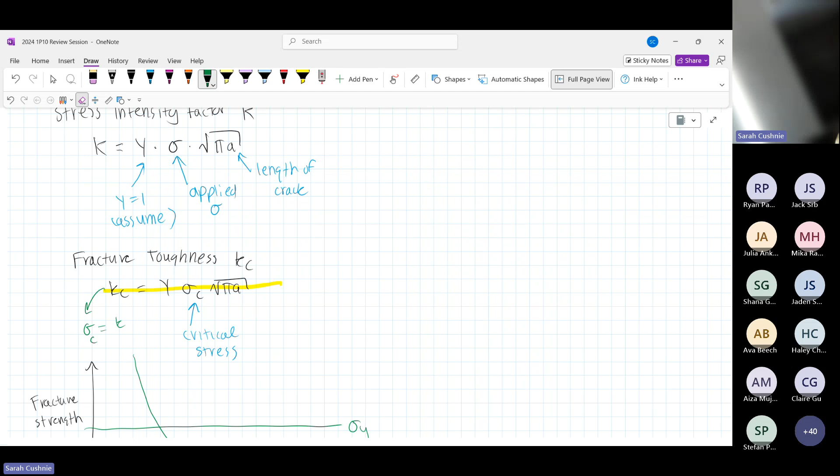But we also have, if we were to rearrange the stress concentration or the stress intensity factor, we can solve for the critical stress, sigma C, which is equal to Kc over root pi A.

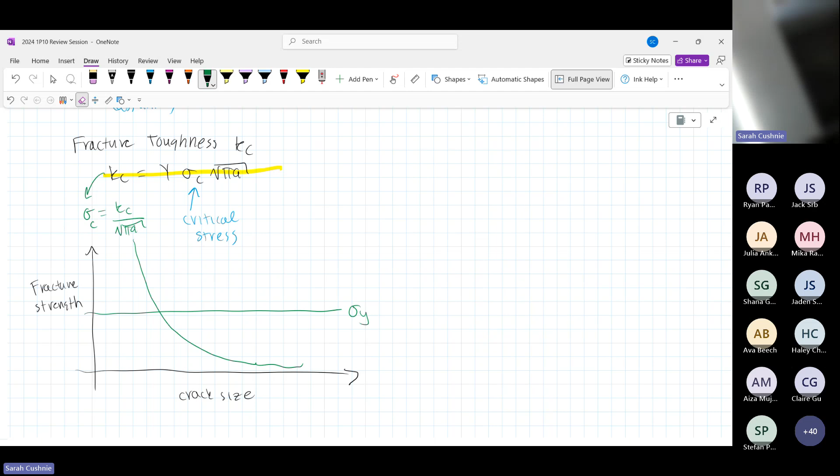And what this shows is the maximum stress that it can withstand before it fractures. So if we have, for example, a high stress but a low crack size, we are going to be above the yield strength. And what that's going to do is cause us to yield, we're going to bend. This is good, because yielding is something that we can see. If we have, for example, a bridge, we can see when it starts to bend.

We don't want it to, but theoretically you can see when it starts to bend. And if you have low stress applied and low crack size, again, we're totally fine. But let's say now that we have a big crack and even just a medium stress applied, so we know we're below the yield strength, we know this material can handle it based on yield strength, but we haven't accounted for the crack size, so it's going to fracture.

This is not good. Here's another classic example in terms of pressure vessels. Let's imagine we have this big tank storing a bunch of, I don't know, hydrogen gas. If we're up here and it starts to yield, we're like, ooh, that's not looking too hot. Maybe we have a small leak, we can fix that. But if you get down here and you start to fracture, all of a sudden this thing blows up in your face, and that can be extremely dangerous. So in concepts like this, it's really important to consider the fracture strength and not just the yield strength.

This also demonstrates ductile versus brittle fractures. Brittle fractures will be that cracking, that ka-chow falling apart, right? In terms of a brittle fracture, that would be in areas like here, where our brittle fracture occurs when sigma c is less than the yield stress. We're not getting that yielding. We're going to have something that looks like this in our stress strain graph because we have no yielding.

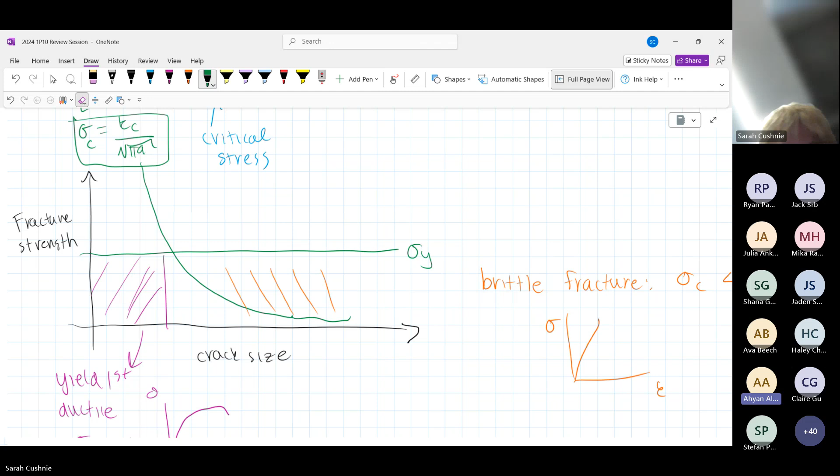So what happens in between the ductile and brittle fracture region, the non-shaded area? I drew this in the wrong spot initially because realistically, what we think about is increasing the stress until we hit something - so it's more this region, which is all going to be brittle fracture. Because as you start to increase the stress, the loading you're placing on it, this is the line we hit first. Does that make sense?

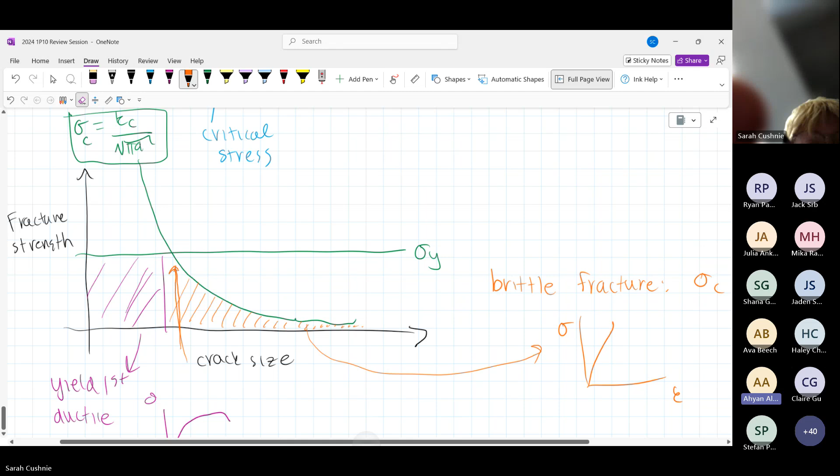Yes, that was unclear on my part. So below the yield stress, where it hasn't reached fracture strength, the material can have wear and tear and fatigue. Is that correct, anywhere below the yield stress? Anywhere below either of these failure stresses, yes, we could have fatigue that occurs. I didn't add fatigue as one of my main concepts to review, so we can talk about that more in the Q&A if you want. But as soon as we hit either the yield stress or the critical stress, we're no longer going to have fatigue present because we've reached a new failure mechanism - we're either going to yield or fracture. Does that make sense? Beautiful, any more questions?

Like these graphs? Yes. Thank you for catching that.

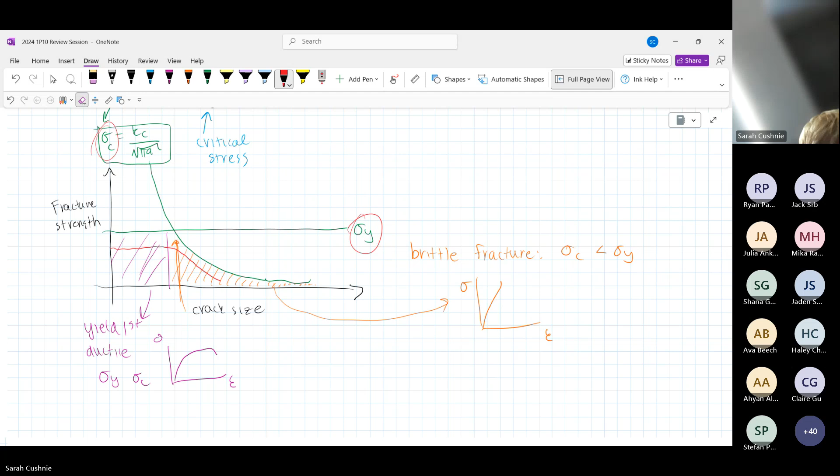Beautiful, any other questions? Will you have time somebody to ask and go over something in person? I'll get back to you online soon.

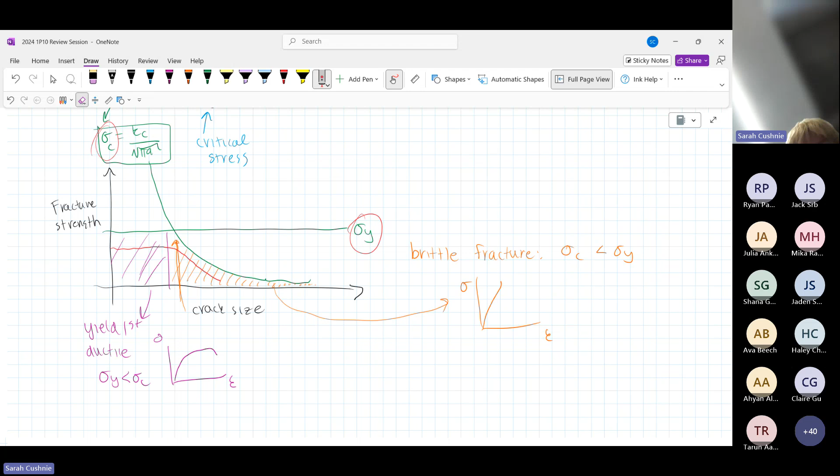The area itself didn't technically shift - this was just me being bad in my initial explanation and drawing. Realistically, when we look at this graph, what we're thinking about is starting with 0 stress at the x-axis, then slowly increasing the stress as we go up the y-axis. So in this region on the left, we go up until we hit some failure mechanism - this green line, the yield stress. So we're going to yield first. In the orange region, I initially drew it in a bigger area because I was lazy, but realistically it's the area underneath the graph that we care about, because we start with low stress and go up until we hit that failure mechanism, the critical stress. Does that make sense? Amazing.

Whoever was online, what was your question? Oh sorry for interrupting - are you going to have time to go over cyclic fatigue, that section? Yeah, I can go over that. We'll talk about strengthening mechanisms, then I'll go over cyclic fatigue for sure. Okay, thank you so much. Of course.

Alrighty, so we'll talk about strengthening mechanisms now. Whoa, thank you, OneNote.

Strengthening. So when we talk about materials engineering, we can talk about the materials themselves, but a large part of materials properties depends on how we change it, how we modify the material. And I think this is where things get kind of fun.

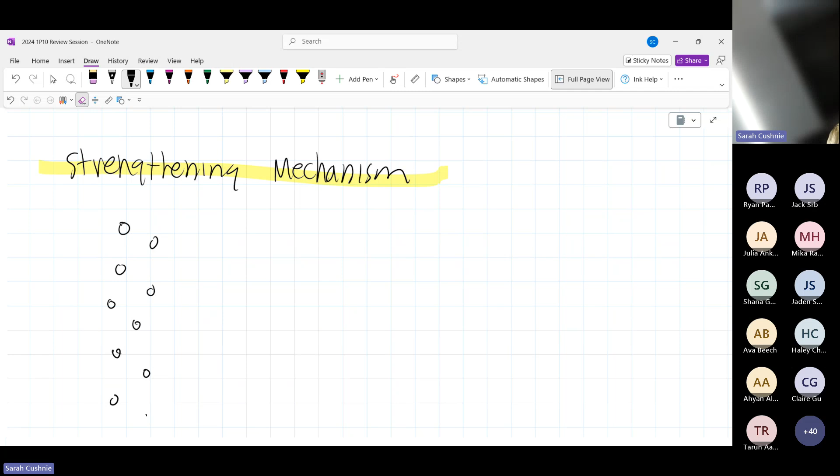Oh no, what are you doing, buddy? Oh, I don't like this. Yeah, this is really stressful. Anyways, imagine this is a nice, pretty lattice. God, I actually hate everything. Yeah, I'm gonna close OneNote and open it up again. Sorry, guys.

We like to imagine that we have nice, pretty lattices, right? But in reality, materials are full of defects. So instead of having a nice, pretty lattice with all of these bonds being formed, we're going to be missing atoms all over the place. So we're actually going to have something that looks a bit more like this - and now we're missing this bond. We can get into the reasoning behind this, that it has to do with the entropy of the system - it's actually kind of fun to do the derivation, you guys don't need to do that, but I think it's kind of fun. But we have this missing bond, and we represent this by a dislocation, given by the little cross, as you will.

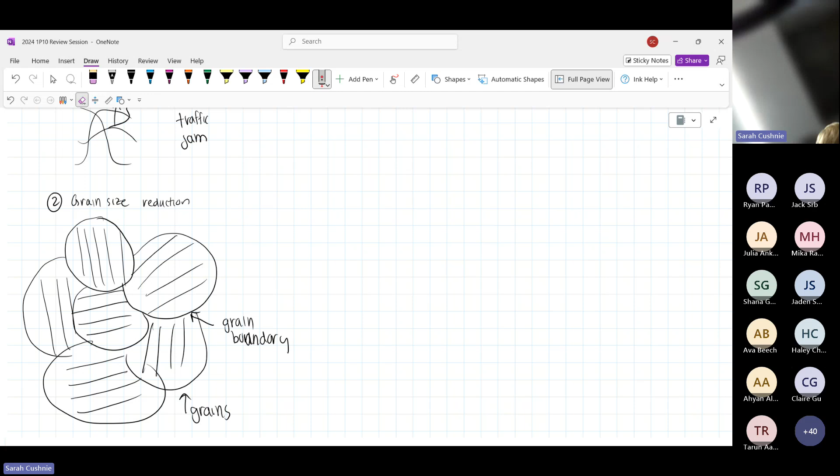So if we think about a dislocation, again, it's moving on a specific plane. Let's imagine a dislocation is moving along this little line here. It's going along, going along, and then it gets to the boundary. It wants to keep going in this direction, but it can't. What happens is it has to change direction, and then change direction again. Doing this process of changing directions as it crosses through a grain takes a lot of energy—a lot of effort for the dislocation to move and shift. So every time it hits a grain boundary, the dislocation needs a lot more energy to move. It makes it a lot more difficult to move. So: grain boundary equals change in angle equals difficult.

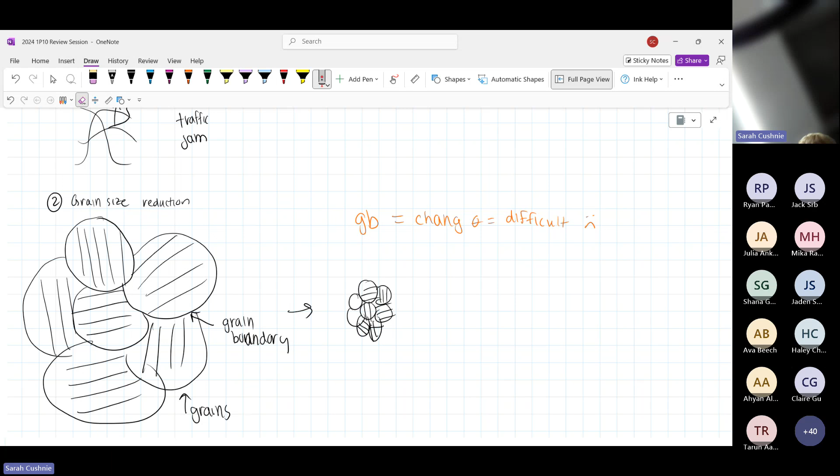And the equation for this is sigma y. So sigma y is equal to sigma naught plus ky times d to the negative 1/2. This sigma naught is the initial yield stress without processing, ky is some sort of constant, and d is the average grain diameter.

So whatever you're given, make sure that your units cancel out with whatever the constant is. This is how you calculate the change in yield strength from the grain size.

Next, we have solid solution strengthening. Basically, solid solution is like if you think of a solution in chemistry, you have a liquid and you mix salt and sugar in, and they mix together. But we can do this in solids too. A very good example would be steel — it's iron and carbon mixed together.

So we have the original lattice, but then you add in a different element in between. You can either add it interstitially, or you can replace one of the atoms with something else. As you do this, it changes the size of the lattice spacing. Let's say we have our nice little lattice without the oranges in there, now we add these oranges in, these extra atoms. This adds extra atoms, and now the bonds are all being squished — they're being pushed apart because we have these extra atoms in there.

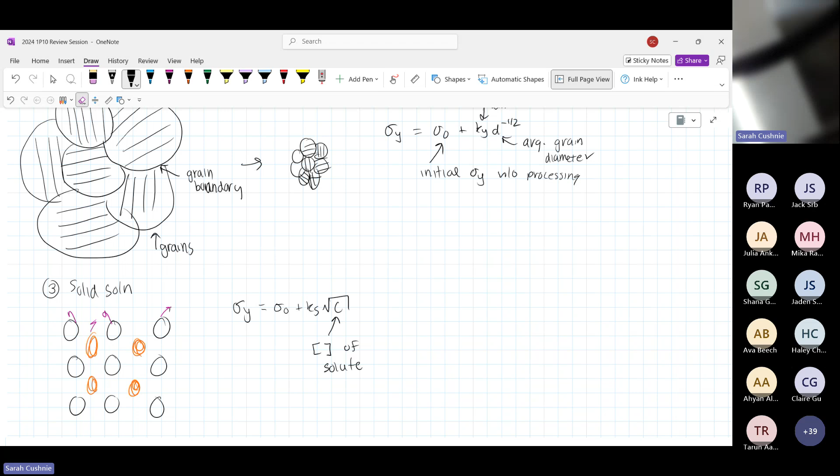So the way we calculate this: sigma y is equal to sigma naught plus k times the square root of c. Here k is just some constant, and c is the concentration of solute. So yeah, that's kind of solid solution.

The last strengthening mechanism I'll talk about is precipitate strengthening. This is very similar, but instead of adding atoms in between the lattices or replacing an atom in the lattice spots at a small scale dealing with bond energies,

let's say we have some sort of lattice, with atoms going in one direction. Then I'm going to throw a big chunk of purple right in here — we're going to break those bonds. This big chunk of purple takes up a much larger space.

A good example is when you're making steel, which is a very common material, especially at McMaster because we have the steel facilities nearby. The point is you can add little precipitates of different phases of steel during processing, and that's going to make it a lot harder.

Imagine we have a dislocation going through the material, and it runs into this precipitate, and it's like, how do I move through this? How can I skirt around this?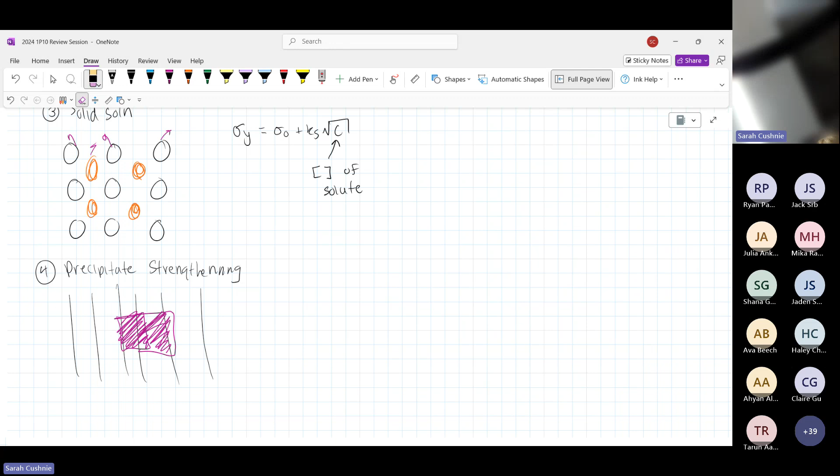I really like this drawing — it's the kind of thing I saw in videos. You can find TEM images showing a dislocation moving through a material with precipitates, and you'll see the dislocation moving in a direction, getting stuck around them, trying to go on either side of that precipitate, and eventually having to go on one side or the other, but it gets stuck on that.

Dr. Zurob, who is the chair of the materials department, compares this to running into a speed bump, where you have to slow down no matter what — you can't just smash through it. It's like a speed bump, so it has a difficult time moving through.

The equation for this: sigma y is equal to sigma naught plus k over L, where L, I believe, is the distance between precipitates.

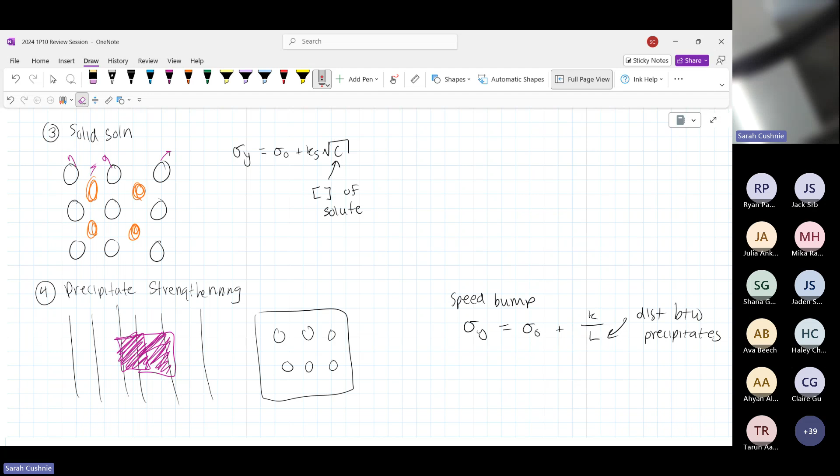And you can think of this because if you have a very small distance between precipitates, this will be really big, so you're going to increase the strength. Because a small distance means that it's really hard for the dislocation to squeeze between them.

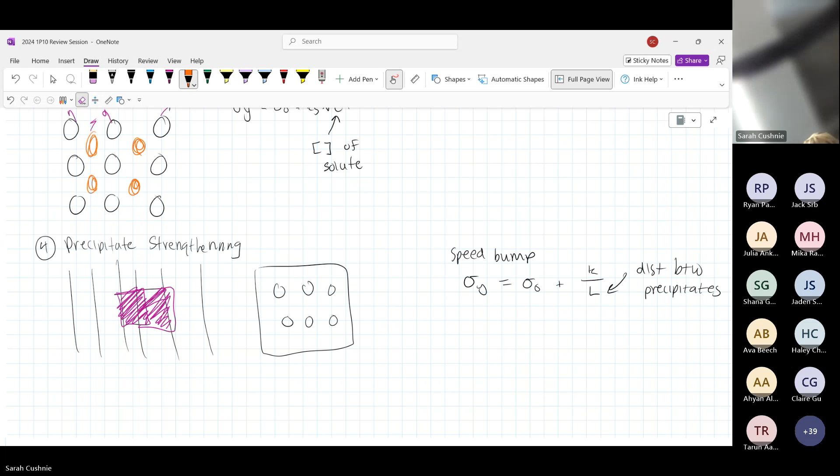Any questions about strengthening mechanisms? Go for it. This? This? Yeah. That's the yield strength. Yeah. Which we're trying to increase to make it stronger.

So that's the main aspect of materials that I plan to cover. So as mentioned for folks who weren't here at the beginning, this is advertised again as materials, ethics, and design, I think. I only prepared materials because I was told I could only do that. Because I was like, hi, can I only do materials? I care a lot about materials. I think materials is amazing and super cool and very interesting and also a bit more abstract than the other concepts. But now that we're into the next 30 minutes of Q&A, I'm happy to talk about the other stuff as well. But if you ask me ethics questions, I don't think I'll be able to give you anything better than don't be a hacker.

So the question that somebody asked about before was, oh, what was it? It was, oh, person online. What was that question that you had before you wanted me to cover? It was cyclic fatigue. Yes, cyclic fatigue. Yeah. Beautiful. Okay, so now we're going to talk about cyclic fatigue.

So a good way to kind of conceptualize this is in terms of weight training, right? If any folks here go to the gym, you can maybe have like a one rep max on, okay, I'm gonna brag about my brother right now. He recently hit a 1 rep max of 315 for bench. It was crazy. So let's say he could do 315 for bench because he's freaking massive. So that would be his, for example, his yield stress. He can do that. You do it once, he's not going to break.

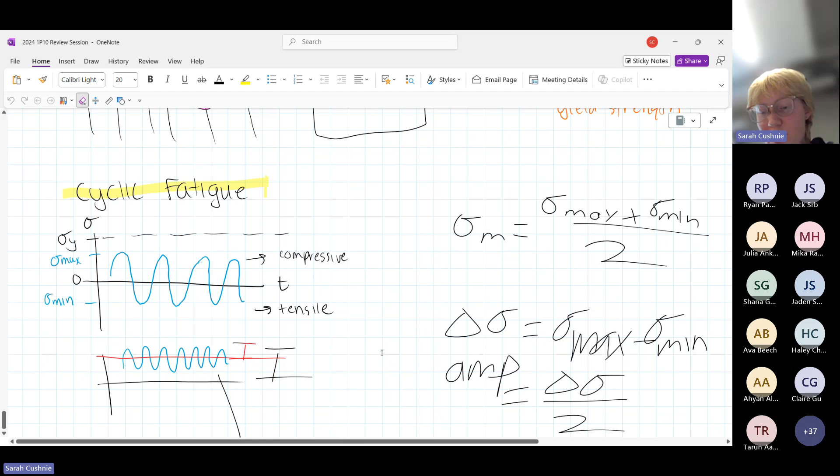Maybe it's a OneNote problem. Maybe we restart OneNote. Oh, my computer doesn't want to do anything right now. Oh God. I can't even turn it off and stop, and okay, so you just don't want to open up OneNote. You hacker. Sorry guys, let me just yell at my computer a little bit. You guys can see all of my tabs. Oh no. Oh no. How do I open up OneNote? Oh my gosh, I'm so proud of myself and my computer. This is actually really embarrassing for me. I feel like I should have really figured out computers by now. I had so many years of online school. Let this be your insight into the fact that upper years actually have no idea what they're doing either. Anyways, pen, what are you doing? What are you doing? Okay, my pen has its light on, but it's still not functioning, so I think we just cry.

So next we can talk about kind of the fatigue life. So let's talk a little bit more about these graphs. So for some materials, there's a value at which no matter what, if you stay below that stress, then you're not going to have fatigue. So for example, if we're talking about, I actually can't think of an example. Basically, if you stay at a low enough stress, you're not going to undergo fatigue.

So you can think of maybe a table, right? You can write on that table over and over again, and you can apply a little bit of stress to that table as you write on it, but it's not going to break no matter how many times you go on that table or how many times you sit on a chair. That stress you're applying isn't going to cause any breakage. So that's called its endurance limit.

If anyone can't actually see me online, I'm actually having a mild mental breakdown at my pen right now, but that's okay. We're trying our best.

So we have some sort of endurance limit, and basically we have stress and we have number of cycles, which I'll call N, and I'm too lazy to write number of cycles. So it's just going to be N for now. And if we stay below this stress, we can go on forever. We're never going to fail. But if we get above it, now all of a sudden we're going to approach that fatigue.

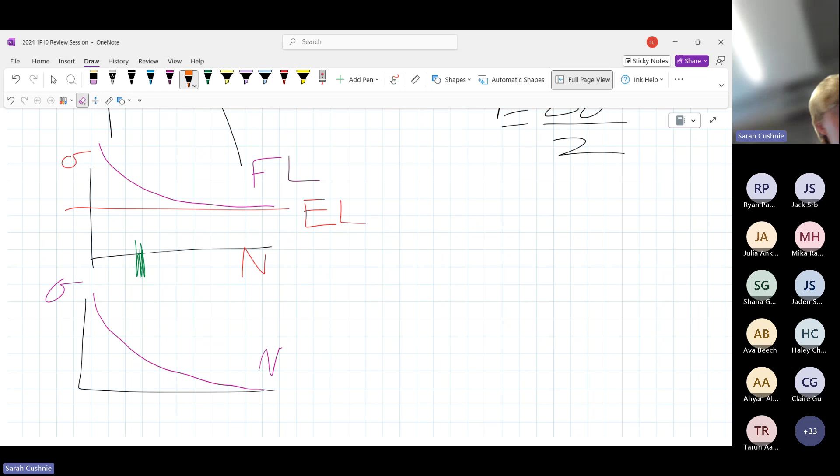So a couple other concepts to go over in terms of fatigue: intuitively, if you increase the stress, then the fatigue life decreases. And if you undergo surface treatments, with the very lovely name of shot peening, or case hardening, those will both increase the stress amplitude for a given cycle to failure. So again, these should both be stress amplitude.

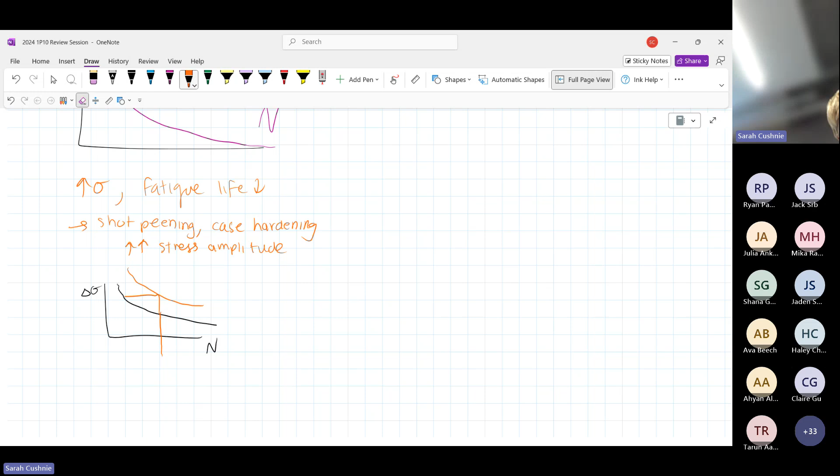So let's say we have stress amplitude versus number of cycles to failure, and normally it looks something like this. If we undergo either of these treatments, then we'd have something that looks like this. So you can think of it as, for a given stress, you can undergo many more cycles until failure, or for a given number of cycles until failure, you can have a much higher stress or change in stress. And lastly, we want to avoid any cracked components, because as soon as you get a crack, it's going to affect the fatigue life a lot. It's going to fatigue a lot faster and feel those stresses a lot more because of the stress concentration.

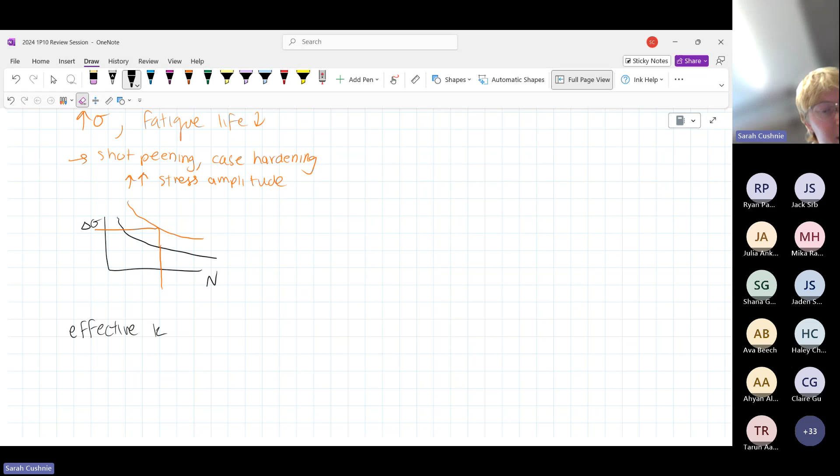So we call this the effective stress intensity factor. I'll just call it effective K, and we call that delta K. We calculate this as delta K equals K max minus K min. This depends on the different size of cracks present in your material. But as time goes on, the K that you have is going to increase because your cracks are going to get bigger and bigger, which means you're going to fail a lot sooner. This is delta K, and that's the basics behind failure, the basis behind fatigue.

Does that make sense? Yeah, that makes sense. Thank you. Beautiful. Go for it.

So is K like a constant in this last graph? In this last graph, K is not a constant because it's continually increasing with time. The question for folks who didn't hear is: is K a constant? And it's not, because as time goes on, as you undergo more cycles, K is actually going to increase because our cracks are going to be getting bigger. So K just represents the stress intensity factor - how much are we feeling those stress lines around the edge of a crack. This represents the differences that we're having as we undergo the cyclical stress.

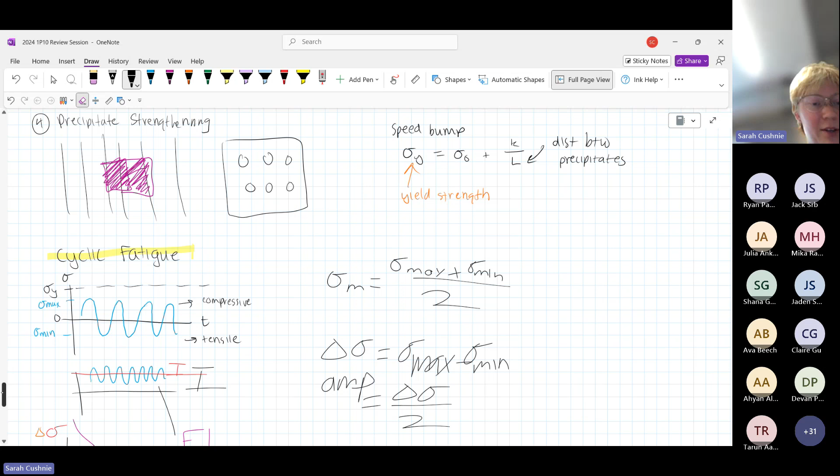But essentially, what we're talking about in all of these cases is that the yield stress is going to be equal to some initial yield stress before we have any sort of processing done, plus some value. And it's this value that's going to be changing as we do the processing, and it's going to increase. So by increasing this, we're going to increase our yield stress.

So there's a few different ways that we can do this. With work hardening, remember we're doing some sort of strain - we're bending the material. This epsilon represents the strain. And I don't know what N is, I'm so sorry. If you're really dying to know, send me an email and I'll figure it out for you. I don't see it in the slides, and I actually don't remember ever learning this equation before.

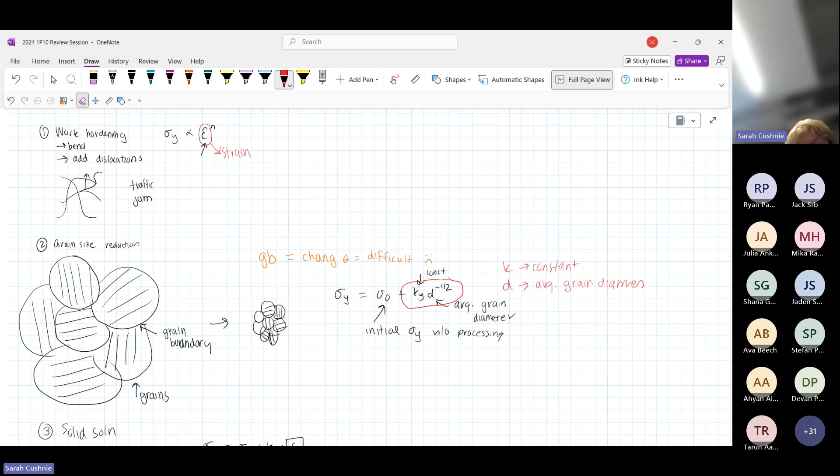In terms of grain size, now we have this value. K is just a constant - it'll be given to you. But D here is going to be the average grain diameter. This is how, if you're given a formula sheet and some question, you can try and relate them together, because you can think: I don't know which equation to use, but I know I have grain sizes, grain sizes have some sort of diameter. And it's the size of the grain that's going to affect its properties. Therefore, I need to find some equation that has a diameter in it, and that's where we see this D.

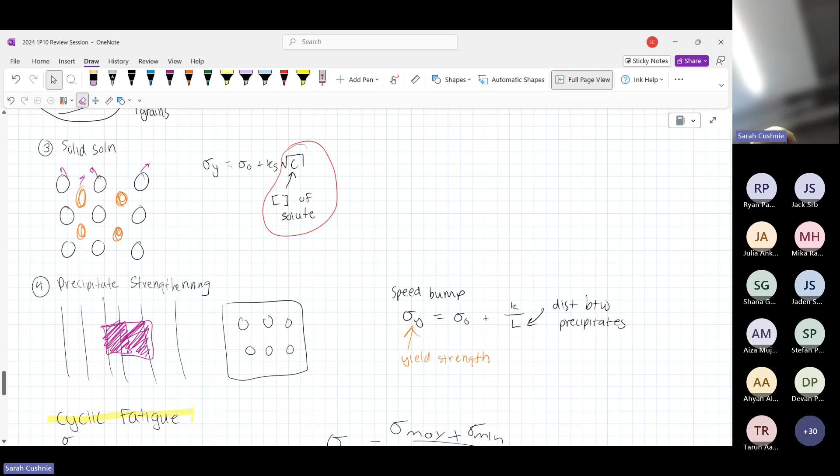Next we have solid solution - this is where we have things mixing together in some sort of solution. We're going to have some sort of concentration, and that gives our C value. Lastly, we have precipitate strengthening, and this is where we have big chunks in the material, so we want to see how far apart these chunks are from each other, and that's given by the L. In both of these situations, we still have K values, and those are just random constants that will be provided to you. Does that make sense?

Yeah, that made perfect sense. Thank you, beautiful.

Just a quick extension to that—you mentioned that there's going to be a lot of unit conversions. How would you go about managing that, since there are so many different units and equations?

So the question was how do you manage all of the units and equations. Dr. Sask might be nice enough to make you not have to do any unit conversions, but maybe she will, I don't know. There's a few different ways you can manage it.

Personally, whenever I'm given a question with a bunch of words, before I begin solving it I just write out all my values on the side. For example, maybe I'm given yield stress equal to 200 megapascals, and the radius equal to 4 meters. Just by looking at these, it's important to understand the units.

Then maybe I'll write next to this that this is equal to 200 times 10 to the 6 pascals, just so I know in my head that I can convert it into SI units, newtons per meter squared.

Next, when you're solving the question—let's say, oh golly, OneNote, why do you hate me—we're solving some sort of question. We'll just do a very simple example: we're trying to find Young's modulus.

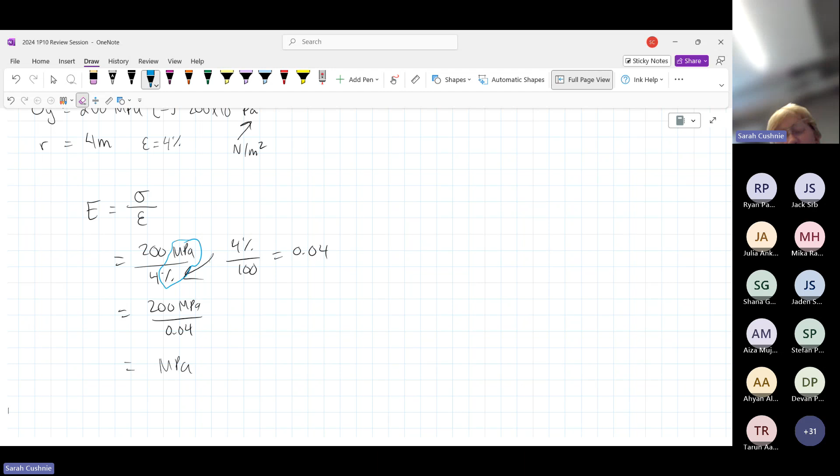But another strategy you can use is to put everything into SI units. Remember, SI units are things like newtons, joules, pascals—which is newtons per meter squared—and meters. So instead of millimeters or micrometers, convert it all to meters. Instead of megapascals or gigapascals, convert it to pascals.

It's just a matter of staying cognizant of it and making sure you aren't dividing meters by micrometers or something like that. Does that help a little bit? Yeah, that helps a lot, thank you so much, beautiful.

If nobody asks me questions, I can just yap about how great materials engineering is and how you should all do it next year. But somebody asked me another question online, so you guys are unfortunately saved from that.

Someone online asked: are we given the unit conversions in our formula sheet, or should we remember them? Excellent question—my best understanding is you're given the conversion between megapascals and everything else, but I think that's all you're given.

Okay, alright, thank you. Of course. I'm going to stop recording here, for what it's worth.

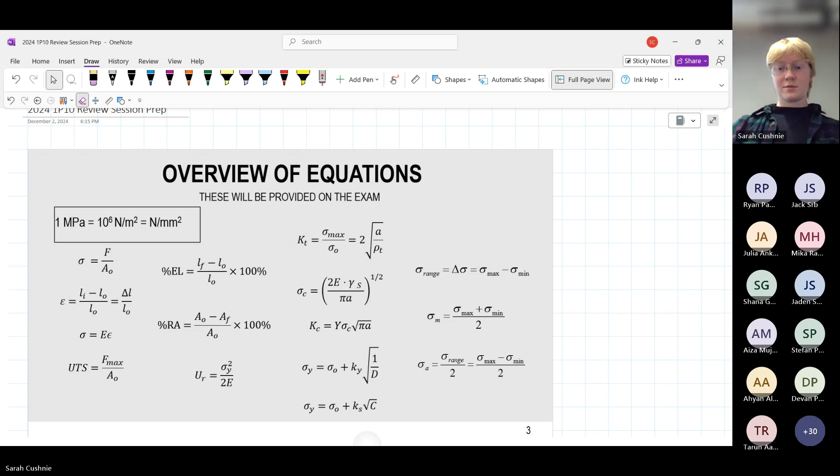Guys, I actually hate everything. I don't, I'm just frustrated by my computer. Let's stop sharing, maybe that'll help. I'll start sharing my screen again once it stops glitching out on me.